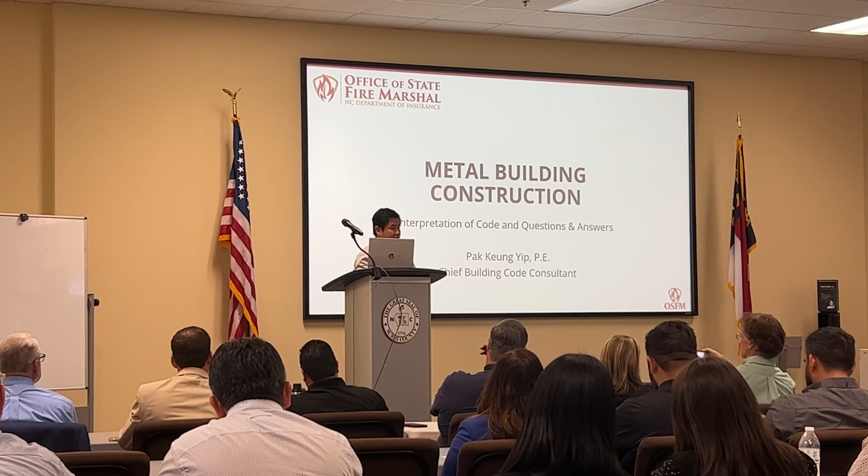I'm gonna turn this over to Pak and DOI and see what we can do to make this better. Thank y'all. My name is Pak Yip. I'm from NCDOI, Office of State Fire Marshal, Chief Building Code Consultant. Today I have another code consultant come with us to attend this meeting. I have Dan Dickman, who is our energy code consultant, and Curtis. He is our new residential code consultant, and also I got Tara come with us. She can address all the accessibility questions too.

So today here we are trying to address the code questions, if you have any. We try to provide the interpretation of the code. Again, DOI or Office of State Fire Marshal do not make the code. We're not writing the code. We are doing as best as we can to provide the code interpretation for you guys. Let's go through some of the terms that we come across regarding this meeting.

We have some concern from the homeowner, and when they have some code questions, they send an email to us. And today we are trying to address these questions to you guys and showing you what's the answer we provided, and hopefully it can create more consistency in the industry. So some of the terms that we come across, like the first one here, pre-engineered metal building. So this is the one that we deal with a lot with these metal buildings.

So these buildings are defined as a set of fabricated component assembly that form a partial building shell designed by the manufacturer. So these buildings come like a package. They were fabricated off-site and then delivered to the project site. Of course, they are metal buildings, so they are made with metal, non-combustible material, that's what we call. And a lot of times they were enclosed by metal panels on their walls as well as their roof framing too.

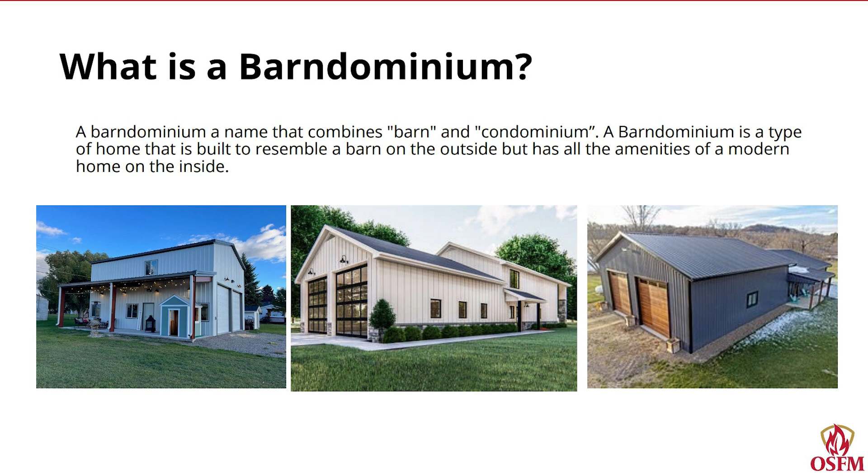Another term we come across, what is a barndominium? This is not a term that we define in our building code or residential code. So when I research online, this is the term that combines barn and condominium. So they're using a concept of barn building, the outlook of barn structures, and put the living quarters inside the barn to make it a barndominium. Again, barndominium is not a term defined in the residential code or building code. So how do we deal with that? It's a new structure, right?

So also we come across a lot of these metal buildings and how they frame these metal buildings. So you can see that the backbone of the building is made up of metal structures. And the walls and all the assembly inside the barn or the building is made up of, for example, in this couple of examples here, wood studs, just like a typical house building anywhere in the States.

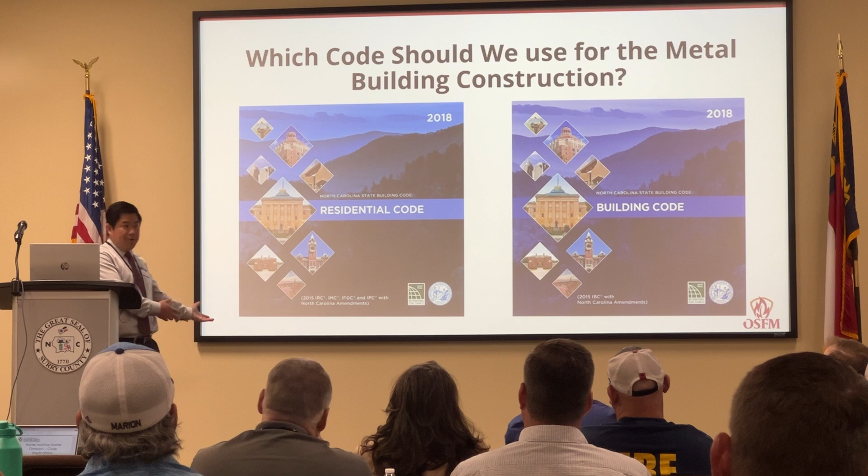So a lot of the questions we come across is, for this metal building, what code is supposed to be used for building this metal building? A lot of misunderstanding is, oh yeah, this is a metal building, it's not covered in the residential code, it has to be built under the building code. So today we try to clarify that. So in our state, we have adopted the residential code and building code. First, we look at the scope of the North Carolina residential code.

The provisions of the International Residential Code for 1 and 2 family dwellings shall apply to construction, alteration, movement, enlargement, replacement, repair, equipment, use and occupancy, location, removal, and demolition of one or more detached 1 and 2 family dwellings and townhouses located on a parcel not more than 3 stories. Let's start here. So the key here is the residential code scope is towards one or more detached 1 and 2 family dwellings and townhouses located on a parcel.

So if you're building a structure that can qualify as a dwelling unit, 1 and 2 family dwelling unit, townhouses on a parcel, you can use the residential code as long as it is no more than 3 stories in height above the grade plane with a separate means of egress, and their accessory structures are no more than 3 stories in height above the grade plane. So these are the criteria if you can use the residential code.

It's not controlled or judged by what type of material you use. You can use masonry structures, you can use metal structures, anything you can think of for your residential house, as long as you meet the scope of the residential code.

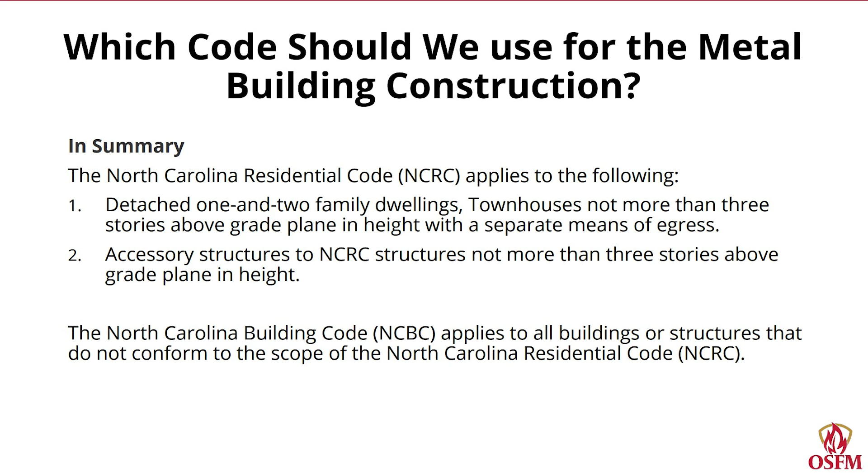Now, one question that comes up a lot is, what if we build a structure that does not meet this residential code? For example, if I build a storage building that is not tied to a residential house. The way we interpret that is this has to be under the building code because it doesn't meet the dwelling unit criteria. It doesn't meet the scope of the residential code. So we have to use the building code to interpret that.

So another question we get a lot is, is engineered design always required for a metal building? So again, we're starting from the residential code first: when a building of otherwise conventional construction contains structural elements exceeding the limits of section R301 or otherwise not conforming to this code, these elements shall be designed in accordance with accepted engineering practice. The other part of that tells you how to use the engineer for that.

So the key here is that if your structure contains structural elements exceeding the limits of section R301, R301 from the residential code sets the criteria, the design criteria for your building. So it sets up your wind requirements, what type of references you can use for your building, or the second criterion, not conforming to this code, which is the residential code.

So the rule of thumb is if you have a building that does not conform to the residential code, again, we look at the residential code as a prescriptive code. So it gives you the design of the structures. For example, chapter 5 gives you the floor, chapter 6 gives you the stud height, braced wall, chapter 8 gives you the rafter size. All these are covered in the residential code, right?

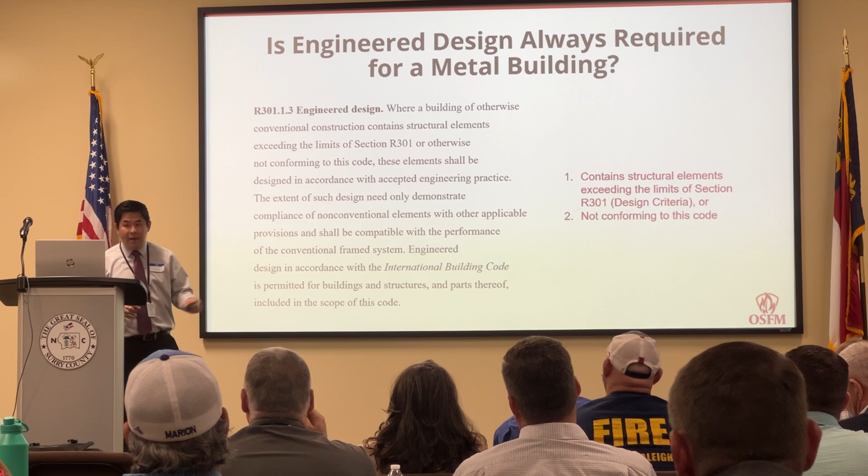If you can use this information, these design elements for your building, you don't need an engineer. You can use the residential code for that. Now, if you have something that is not covered in the residential code, then under this section here, it will require an engineer to help us evaluate whether it meets the code requirements or not.

So another thought is the building permit. Now this, we want to cover that. This one first is, which code requires the building permit? So the building permit is actually not coming from any code, not coming from the building code, not coming from the residential code. It's actually coming from the General Statute, 160D-1110.

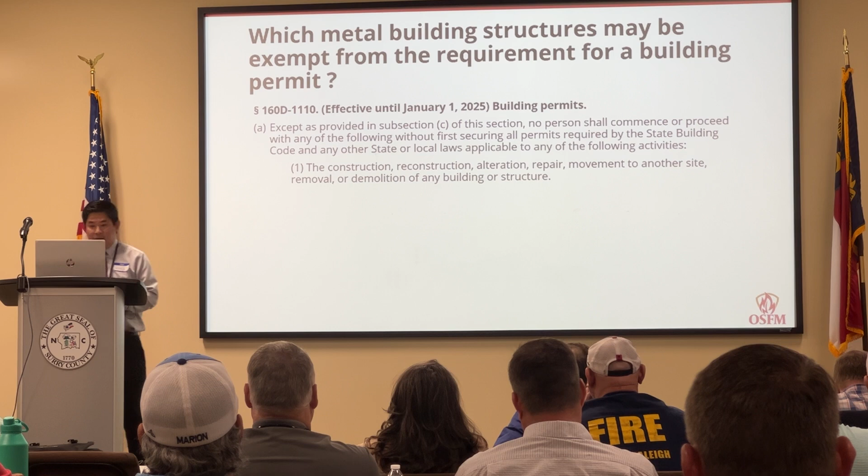Except as provided in subsection C of this section, no person shall commence or proceed with any of the following without first securing all permits required by the State Building Code and any other state or local laws applicable to any of the following activities: the construction, reconstruction, alteration, repair, movement to another site, removal or demolition of any building or structure. So you should have a permit for any construction, unless it is exempted by the North Carolina General Statute or the NC Building Code or the Residential Code.

So the General Statute actually has an exception for farm buildings. So if your building qualifies as a farm building, not used for sleeping purposes, then under 143-138 it is exempt from the building codes. Which means that if you qualify under that statute requirement, this is a farm building, meaning non-residential buildings or structures that are used for bona fide farm purposes as defined in these general statutes here. That is an exception from the general statute, that you don't need to meet building codes.

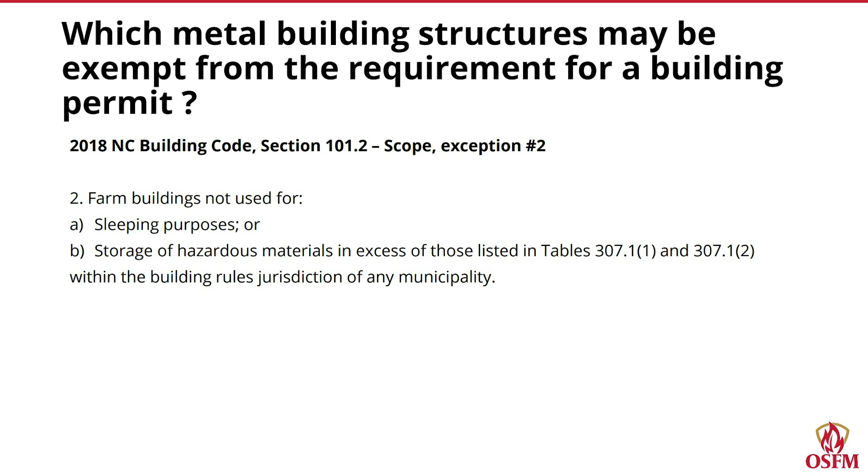Now, the building code also has exceptions. Section 101.2, the scope, exception number 2, says pretty much the same, except that if it qualifies as a farm building, not used for sleeping purposes, or not used for storage of any hazardous materials exceeding Table 307.1(1) or 307.1(2), then you are exempted too.

From the residential code, we also have one exception for similar structures, which are identified as accessory structures. Under item 6, detached garage, detached carport. So under accessory structures, a detached carport is supposed to be constructed per the residential code. But there are exceptions that apply to that. Portable lightweight carports not exceeding 400 square feet or 12 feet mean roof height are exempted from the residential code.

So if you have an accessory structure, now again, that's why I put the definitions here. It has to be an accessory structure to the dwelling unit. It cannot be a standalone structure, because a standalone structure will be under the building code. If it is an accessory structure to the residential building, and if you qualify as not exceeding 400 square feet and not over 12 feet mean roof height, and use it as a carport, you're exempt from the residential code too.

So these are some of the examples here. So if you have a carport less than 400 square feet and less than 12 feet mean roof height, these structures are exempt from the residential code too. Again, that has to be tied as an accessory to the residential structure.

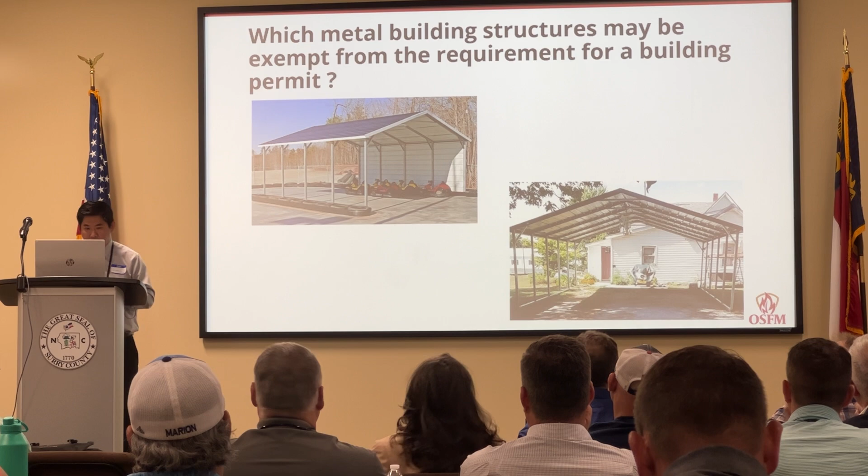So one thing that I want to clarify is, even though you are exempt from the building code, either by the general statutes, building code, or residential code, all electrical system work requires permits too. And 143-142 requires that electric wires of houses and buildings shall conform to the requirements of the building code and any other applicable state or local laws. So even though you qualify as a farm building, even though you have a carport that is exempt from the building code or residential code, you still have to have an electrical permit if you have any electrical system work involved in that.

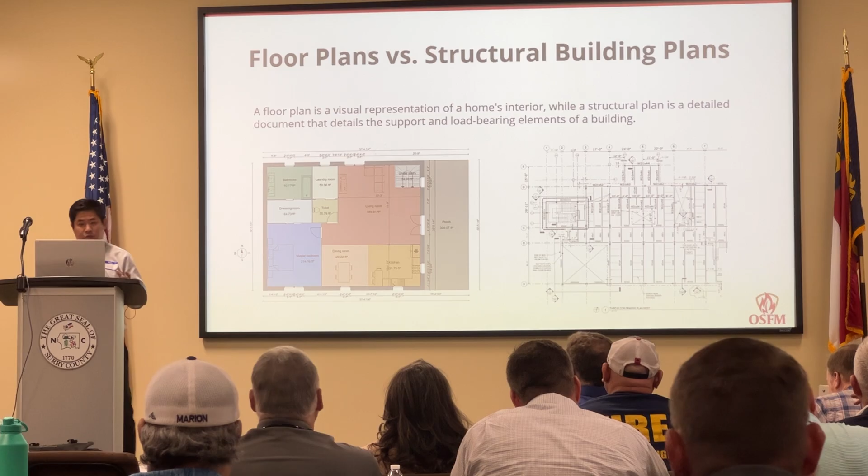So let's talk about how we comply with the code. So I want to clarify one thing about the documentation for applying for this permit. I want to clarify what is a floor plan and what is a structural building plan. So a floor plan basically is a visual representation of the home interior, while the structural plan is a detailed document that details the support and load-bearing elements of the building. So when you see a floor plan, you see how the designer divides the interior space in the house. But the structural plans cover all the backbone of the house. For example, the foundation, the framing, the roof framing, any details for that.

Again, this is one of the examples of floor plans. The floor plan will show the interior wall locations, the rooms' layout and size, and the size and location of the windows and doors. The reason why we have to have a floor plan is to make sure that this building complies with the code. There are a lot of requirements, for example, from chapter 3 in the residential code, about the rooms. So if it is a bedroom, what do we require? A bedroom requires egress, the special egress requirement for a bedroom. We have to have an egress window in any bedroom. The room size: we have a room size and minimum dimension for a habitable area from chapter 3 in the residential code. So the floor plan will show all these for that particular building, whether it meets the code or not.

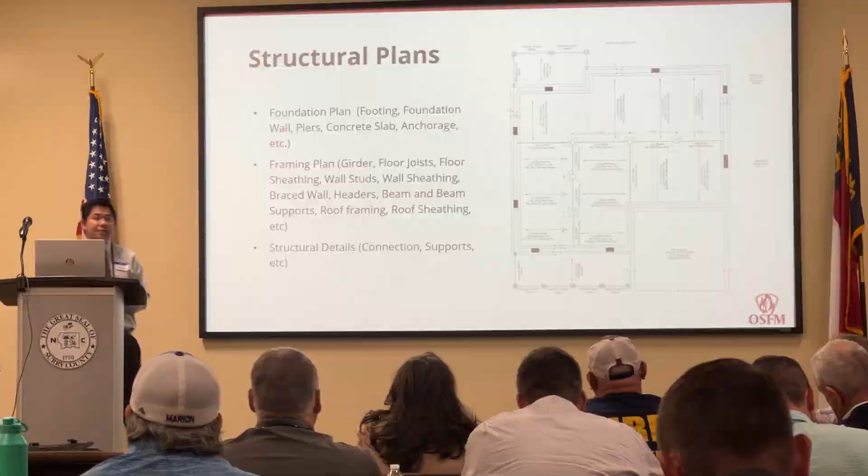Now, from a structural plan, typically a structural plan, like I said, covers the foundation, including footing, foundation wall, piers, concrete slab, anchorage details, things like that. The framing plan covers the girder size, the floor joist size, any type of wall sheathing, the wall stud size, braced wall header size, beam or beam supports, roof framing, roof sheathing, all these framing elements. Also, it usually covers the structural details too.

So a structural plan covers the construction, the structure requirements. But most of the time, structural plans don't necessarily cover the floor plan's details. In a structural plan, you probably won't find the room length, the dimension of the rooms. It doesn't cover the room's layout, the interior wall location. It doesn't cover that type of information. So that's the difference between these two types of plans.

So there are a lot of questions about structural plans too, when we receive questions from homeowners or local jurisdictions. One of the ways we look at the structural plan is from the code official standpoint: we don't review the details of the structural stuff. We cannot evaluate whether you need 5 bolts here, 10 screws here, 5 nails there. We cannot do that because we're not PEs. A code official is not a PE, so we cannot interpret the design of that.

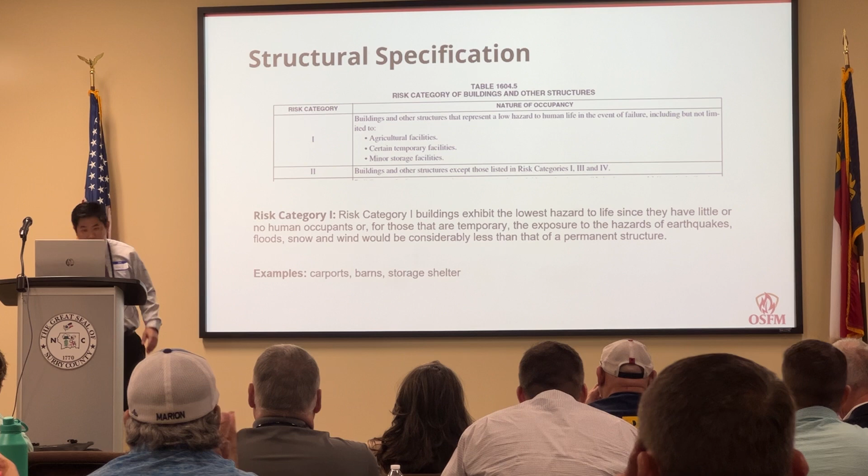So risk category comes with 4 different categories covered in the code. The first 1 or 2 will most likely apply to the meeting today. 3 and 4 are more important buildings, for example, airport, fire station, EMS station. But I want to clarify that. A risk category 1 building has the lowest hazard to life since it has little or no human occupancy, or for those that are temporary, the exposure to hazard of earthquakes, floods, snow, or wind will be considerably less than that of permanent structures. Examples are carports, barns, storage shelters. These are buildings typically not for human occupancy.

So for example, you have a small storage building on a farm, or even one attached to a primary residential structure. These are risk category 1. Risk category 2 typically covers anything that's not defined in 1, 3, and 4, and it covers most residential buildings.

The reason I want to bring up the different risk categories is we come across some plans where the engineer designates that the building is designed for risk category 1. Now, if it is designed for risk category 1, it cannot be used for residential purposes, because it has to be risk category 2 in order to use that building for residential use. So that's one piece of information that we come across that we need to clarify. Another thing is the load requirements.

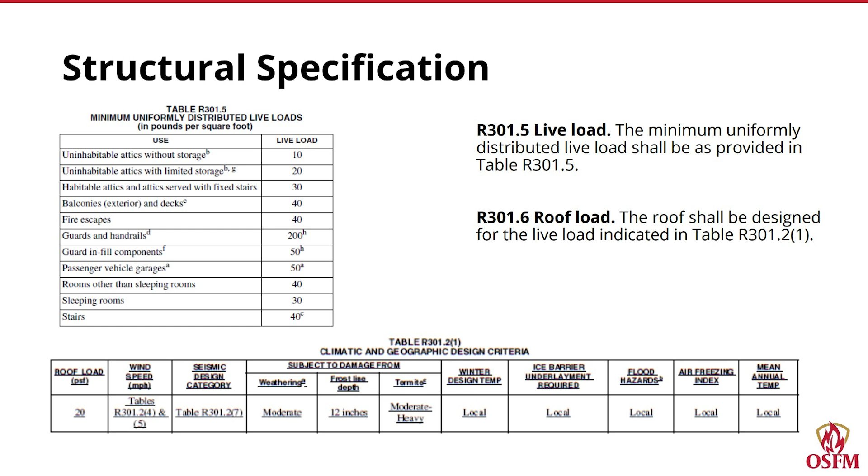Chapter 3 in the residential code outlines some of the load requirements, especially live load, for residential structures. And also, table 301.2(1) requires in North Carolina that all roof loads for residential structures meet 20 PSF live load. And of course, there are other criteria you have to meet for the climatic and geographic design criteria.

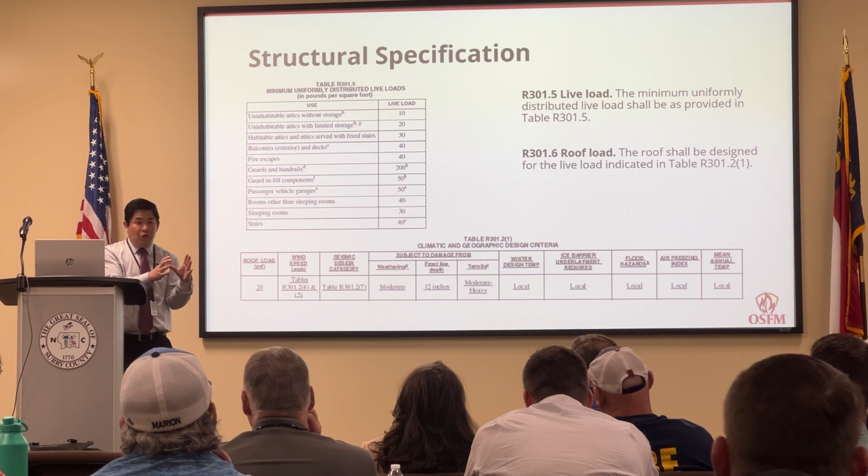The reason I want to bring up the loading requirement is we have questions from homeowners who receive a plan where the structural loadings might not necessarily meet the criteria outlined in chapter 3 of the residential code. And this is the minimum that the code official will look at and review, to make sure that the loadings in the structural specification on your plan meet the residential code requirements.

Another loading that we have concern with is the wind design criteria. North Carolina actually has different wind design zones in the state. On the coast, we have a higher wind zone. In the middle of the state, we have a typical wind speed. And then in the mountains, we actually have a higher wind zone because of elevation change.

And this wind speed design criteria is also covered in our residential code, tables 301.4, maybe? Yeah, 301.2(4), 301.2(5). And this is set by county. So it tells you, depending on which county you're located in, what wind speed you're supposed to design that structure for.

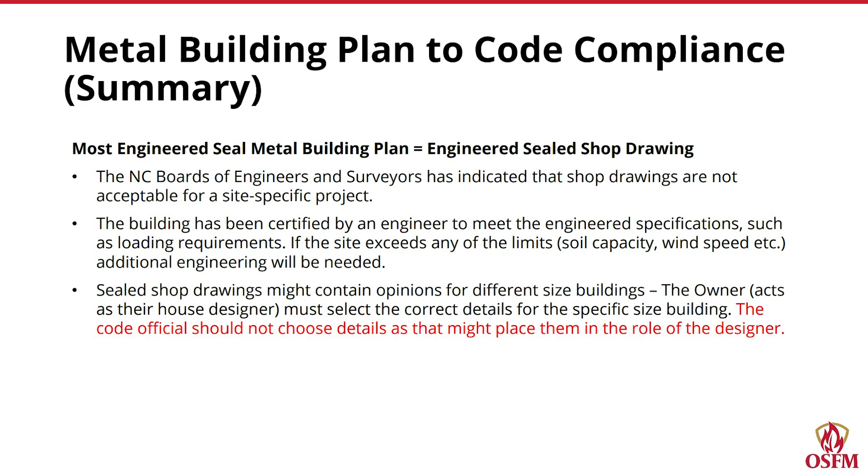So if they present a plan with all these options, the homeowner has to pick the options that meet the criteria for their local climate area or the size of the building. The code official cannot do that, because otherwise it would put them in a designer position.

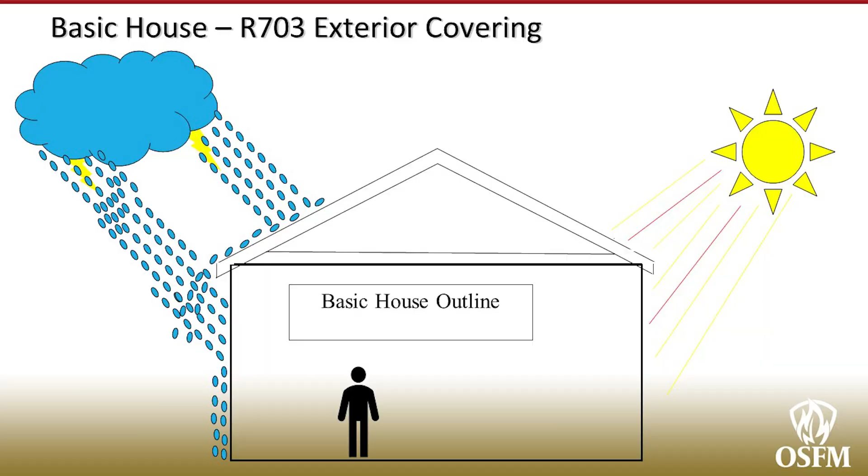So it's not all just words. I have some pictures here. Here's your generic outline of your house. You know, the rain pushes it off. The sun has remarkable properties of driving moisture back into the environment. See? So we're going to zoom in on some of these items. Exterior coverings or claddings are the roof system and the wall system. We're going to zoom in on some of these.

R703.1.1, water resistance. This is from the residential code. It requires a water-resistant barrier behind the exterior veneer, that's our claddings, required by R703. The purpose of claddings: they shed water and protect the remainder of the wall and roof system. Vinyl, face brick, and wood clapboard are all ventilated sidings, as are many of today's sidings, so they rely on a drainage plane behind the siding to allow the miscellaneous water to either drain away or evaporate back to the outside before it causes rot to the wood or corrosion to the siding or fasteners.

Likewise, metal panels also have seams and penetrations and cutouts for windows, doors, and utilities. Any water, whether from weather or from condensation, and people always forget the condensation thing, it's a driving force that's always there, must be planned for and either provided a drainage plane or a means of re-evaporating so it does not sit and cause rot or rust to the cladding fasteners or deterioration of the cladding itself or the substrate. Remember the wind zones that Pat talked about? Well, that cladding only stays on there as long as your fasteners are not corroded away.

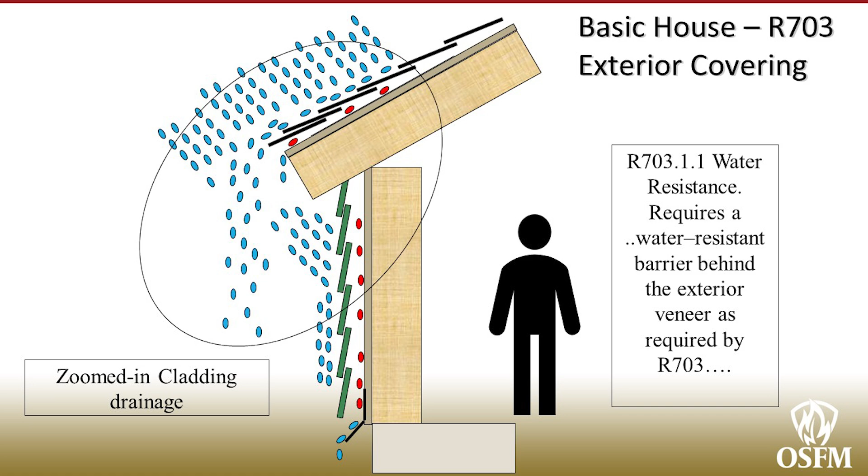These sidings are water resistant, not waterproof. And they have a daily response with the sun, the water vapor in the air, and the building properties they are made up of and help protect. So here again, we have a little illustration there. And we're zooming in on the cladding, this clapboard type cladding. So, zoom in on it again a little closer.

The raindrops highlighted in red are drops that made it past the exterior cladding. They are drained by the water-resistant barrier. Notice how it kicks out on the bottom there? That could be your flashing, kick-out flashing. Okay? This is a normal everyday house.

The barrier could be builder's felt, house wrap, or other materials designed and installed to be a drainage plane behind a cladding. Even in normal construction, spray foam does not address the drainage plane of the exterior cladding as it was applied from the interior and is typically under the sheathing.

So let's change the design outline for a pole barn or barndominium. Okay, here you have a pole barn. I know there's some variations, but here's a basic pole barn outline. We'll zoom in. Now, take the case where you have a basic machine shed type pole barn, good strong construction, but there's no insulation and no sheathing.

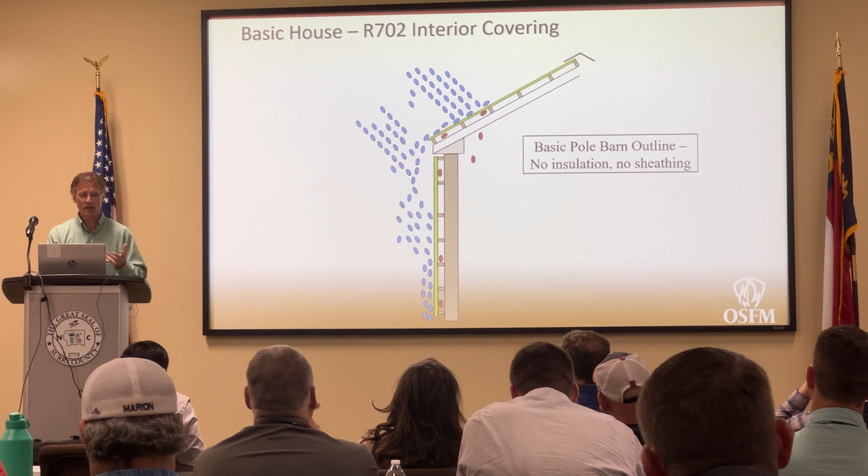Stray water, the little red drops there, that gets past the cladding can drip down the interior of the metal panels or drip down into space, but does not puddle up against frames or fasteners. No harm, no foul. Now let's put internal walls in there, and let's put some spray foam in there.

Now, there's many different ways the walls and roofs could be done, I understand that, both with and without continuous sheathing, but in all cases, the concern for what I'm talking about here is the concern for water that gets past the cladding. How is it drained? How is it handled? That's what the prescriptive code is asking for.

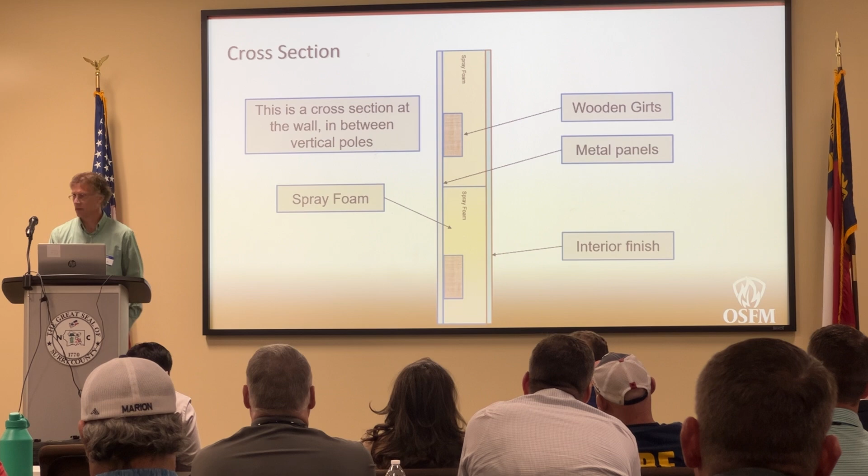So here's a cross-section of a wall in between the vertical posts. These are your wooden girts, and the exterior there, that's pointing to the metal panel on the exterior. And your interior finish, which would usually be a gypsum. Here's an exploded view of it. So the rain is hitting the metal panel on the outside.

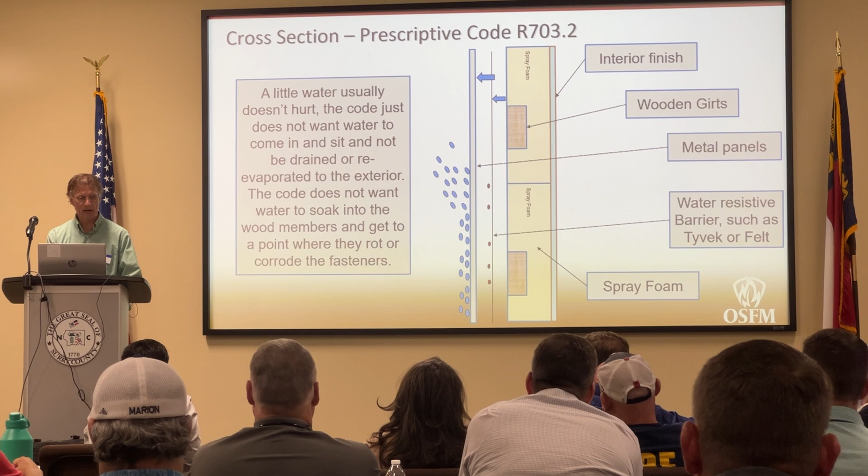But suppose you had a standard construction, you have a water-resistant barrier such as Tyvek or felt, that would be your drainage plane. Anything that gets past there drains down. So a little water usually doesn't hurt. The code just does not want water to come in and sit and not be drained or re-evaporated to the exterior. The code does not want the water to soak into the wood members and get to a point where they rot or corrode the fasteners.

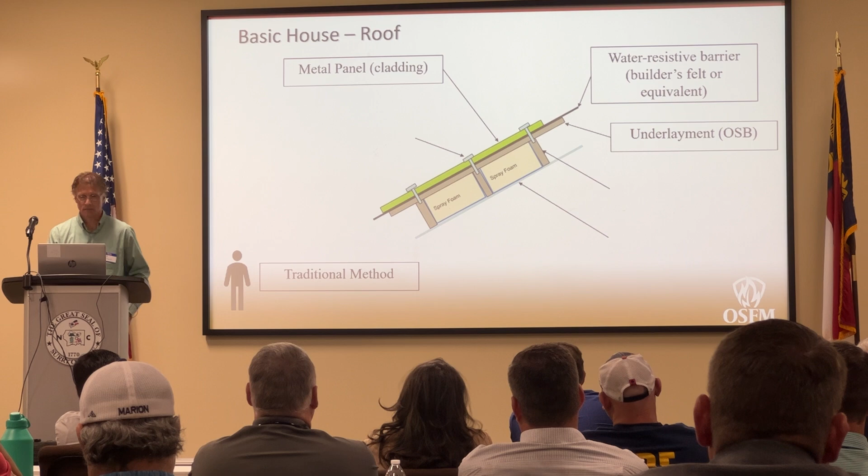So here's the traditional method of a roof. You have a metal panel, that's your cladding, and then you have a water-resistant barrier, that could be a builder's felt or its equivalent, but then you have an underlayment, OSB, that would be normal. And then your purlins, and then your interior finish could be gypsum, and your fasteners. Here's an exploded view of that. But the key here is that underlayment, the OSB.

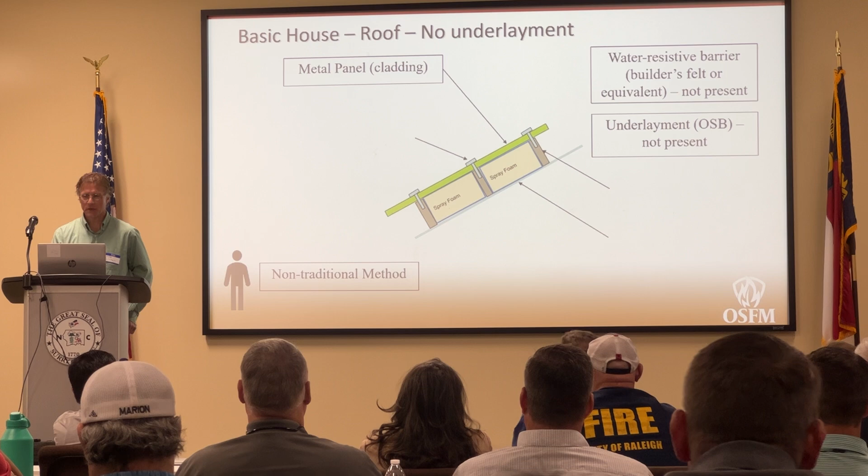Now here's what I start getting into, a non-traditional method for the residential prescriptive code. We don't have a water-resistive barrier. We get this question. They just want to spray foam directly to the underside of the metal. Simplest way, I understand that. But the builder's felt or equivalent is not present. And the underlayment, the OSB, is not present. The metal panel is actually providing the structure, like a screwed-on metal roof, it's the structure also. And of course your purlins.

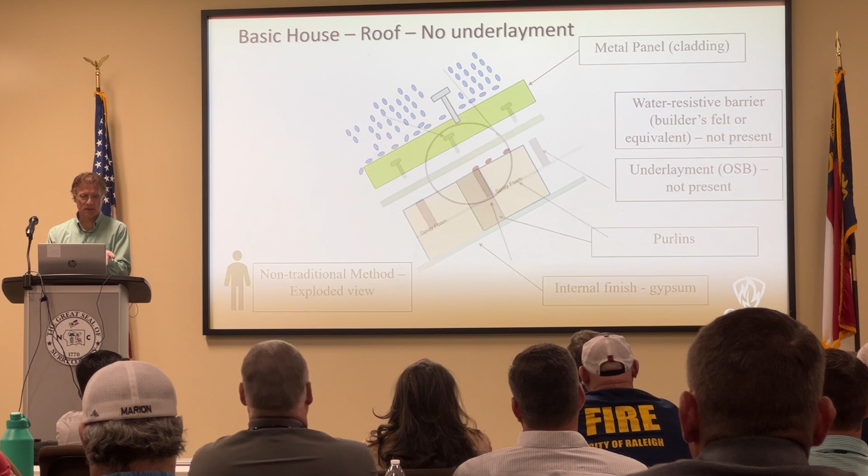So let's explode that. Zoom in on that a little bit more. Nope. Zoom in again, sorry. But you see there those little blue raindrops? Those are the issue, right there.

This non-traditional method, how does it handle that? What happens here without a drainage plane? Does the water re-evaporate to the exterior without damage? Or does the wood soak up the water and start losing its ability to withstand pullout? Or do the fasteners or metal panels start corroding, thereby reducing the cladding adherence properties?

So I just point out there's many different ways you can fasten metal cladding to a roof, but the water-resistive barrier is not exempt by any given method, prescriptively. Okay.

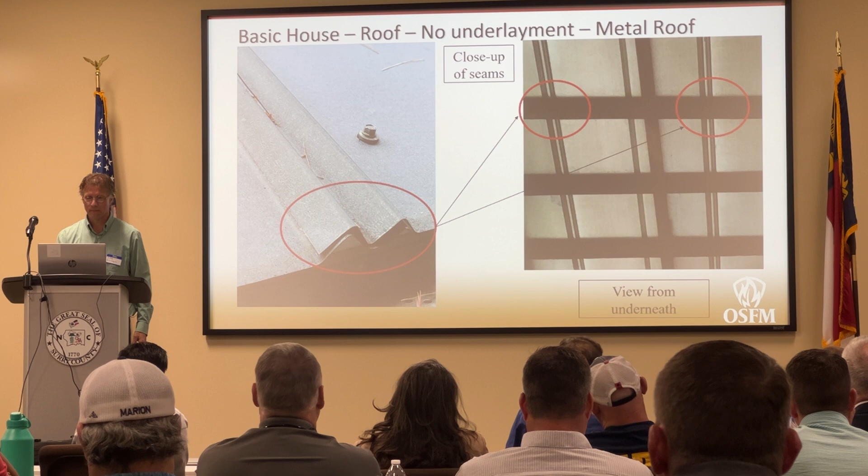So your bulk water just drains away. We see that, no problem. However, warm, moist air migrates in. It draws it in the evening. The metal cools off rapidly. How many of you have seen metal roofs rain from the underneath if there's no insulation? Everyone seen that? That can be a daily process for many months of the year.

But it also causes vapor to condense in the seams and the pocket formed between the metal and the wood framing. Now, condensation in the seam itself will just drain out. It's condensation in the pocket that is an issue, as it cannot drain out. So the sun hits it in the morning. The sun is going to drive out some of the moisture during the daytime, but it's unknown if all of it will be driven out or if seasonal drying will overcome seasonal wetting.

Again, the prescriptive code simply avoids having to answer this question because the drainage plane will be uninterrupted. Remember, it just says you're going to have a drainage plane, period. So we as code officials, and the code officials in the field, can't answer this question. I can't necessarily answer that question. The prescriptive code, built over decades of empirical experience, avoids having to answer it. But if you're doing an alternate method, you need to know the answer.

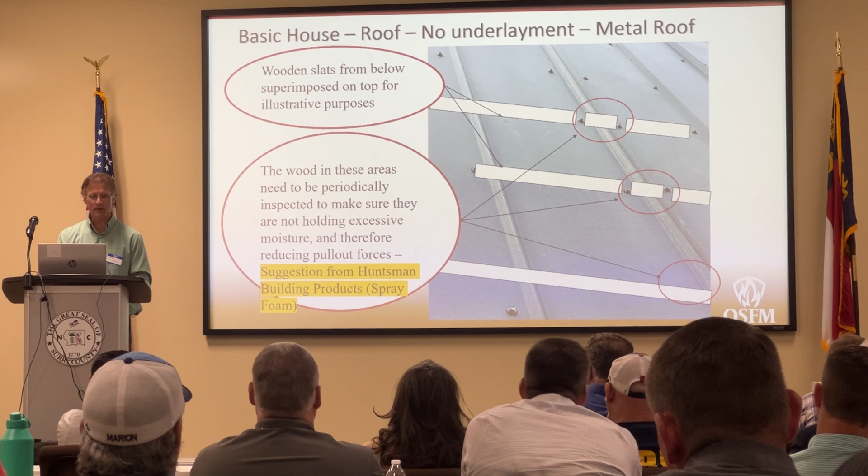Now, I want to read the second bubble there. The wood in these areas needs to be periodically inspected to make sure it is not holding excessive moisture and therefore reducing pullout forces. That's from Huntsman Building Products. They own Icynene, I think. Big manufacturer, quality manufacturer. That's their suggestion in their sales literature. So I'm not making this up. Here's, again, the basic house underlayment.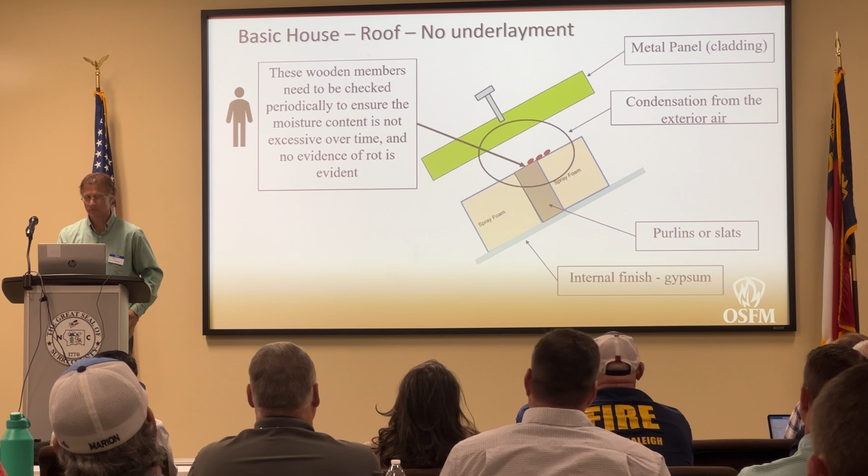Right there. That's just a different view of pointing it out. You know, what's happening there? They're concerned. They realize there's a concern there that's not addressed in the prescriptive code. So what do you do? Again, here's the traditional method on my right, with spray foam.

And if you say people want a simple way to do this without having to avoid all these issues, you can still build it with sheathing. And a lot of those issues go away. And like I say, there's many different ways to build this. This is still an easy way that, okay, you avoid all those issues that we just talked about if you just sheath the building.

So, getting into some summaries here. If the prescriptive code is not being followed, how does the proposed wall and/or roof construction sequence and materials provide the equivalent level of protection to the building assembly? And is the permit holder addressing all the required code sections and functions of the roof or wall?

So if the prescriptive code is not being followed, 904.1: the requirements set forth in this section shall apply to the application of roof covering material specified herein. Roof assembly shall be applied in accordance with this chapter and the manufacturer's installation instructions. Installation of roof assembly shall comply with the applicable provisions of R905.

904.2, compatibility of materials. Roof assemblies shall be of materials that are compatible with each other and with the building or structure to which materials are applied. So I think of an example here.

Pat, can I have all the contents of your wallet, including PIN numbers? Say no. Pat, can I have all the contents of Tara's purse, including her PIN numbers? Say you don't care. I don't care. Tara, you have to give me all your information. Say no. No. But Pat said it's okay. It's not his call, is it?

So, I guess I won't get into alternate methods here because, like I say, we can talk about that after lunch. Oh, so at one point there, it can be difficult to redirect an installer's mindset from the energy code air barrier requirements and the vapor retarder requirements of section R702.7 to the residential building code requirements, R703.1.1. And that was the purpose of this little issue here. That's the end of that.

I want to just follow up and say, you guys in the room who are designers and building inspectors and contractors alike, I think these two fellows right here just gave a great presentation in my opinion. I was a former building inspector from years back, and I think they did a great job to provide good scenarios and talk about when permits are required, design criteria and that sort of thing.

So, again, my name is Curtis Huff. I work for the NC Licensing Board for General Contractors. My title is Field Investigator, but we are also field representatives, which means we like to keep our public informed, to talk to them about board rules, regulations, and that sort of stuff. My presentation will be as short as I can possibly make it. I think we're running a little bit behind, but I hope that this afternoon, as we have our Q&A, I can get a lot of good questions from you. And I'll be happy to answer anything I can. I brought cards so that you can contact me later if you need to.

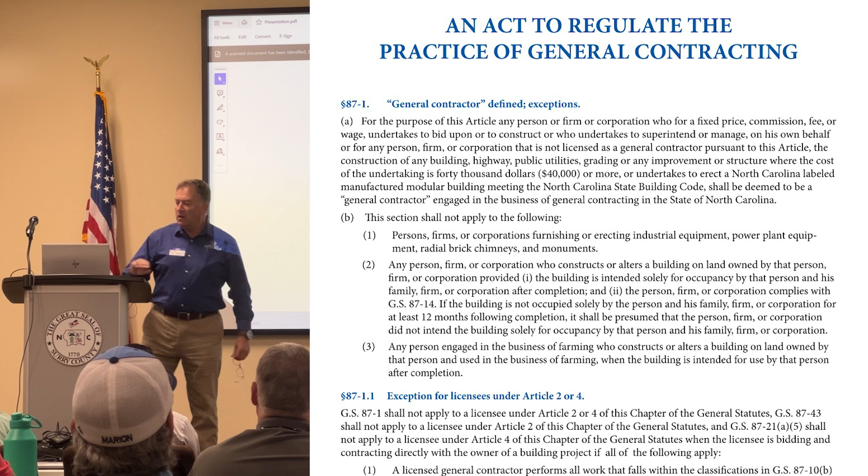So, you've got a pretty good idea about general contractors. Now, I think there's going to be some good Q&As this afternoon, especially from the metal building company folks, about who's installing, who's building, who's erecting, who's contracting. I'll get into the weeds on that this afternoon if you like. For the sake of time right now, we're just going to talk about who we are and what we do. So, that being said, we regulate the practice of licensees.

And we hold our guys accountable for all sorts of things, okay? If you have a license with this board, we hold you accountable for operating; you have to operate in the name and style of the license. Your qualifier is a part of the license, whether it be a sole proprietorship or a corporation; you have to be a W-2 employee, managing member, that sort of stuff.

If you're a residential building contractor, you can't go out and build a 3-story high-rise. What's it called? 4 stories is high-rise? When we turn into high-rise. Nonetheless, you can't build anything that big. You got to stick strictly to residential, right? Which is family dwellings, townhouses. I forget what the other one is. Nonetheless, you have to stick to the classification.

If you're a pool contractor with the board, you can't build a house. You kind of get the idea of how that works. And then we have limitations, dollar amounts on projects that you can work up to. We have limited, intermediate, and unlimited associated with that. So that's the biggest part of what we do. And if there's licensees in the room, you kind of have an idea of what this is all about.

If you want to know more about licensure and what it's all about, you can see me after the presentation's over with, and I'll be happy to discuss it. Give you a card if you need it. You can contact me later.

So now, we're going to move on down to another general statute, titled 87-13. 87-13 is a general statute that speaks to the unauthorized practice of general contracting, impersonating a contractor, false certificate, giving false evidence to the board, and penalties. Now in 13, and not the one below it, 13.1, board may seek injunctive relief. For the most part, this section states that if any person, firm, or corporation is engaging in the practice of general contracting for which you don't have a license, you're guilty of a misdemeanor.

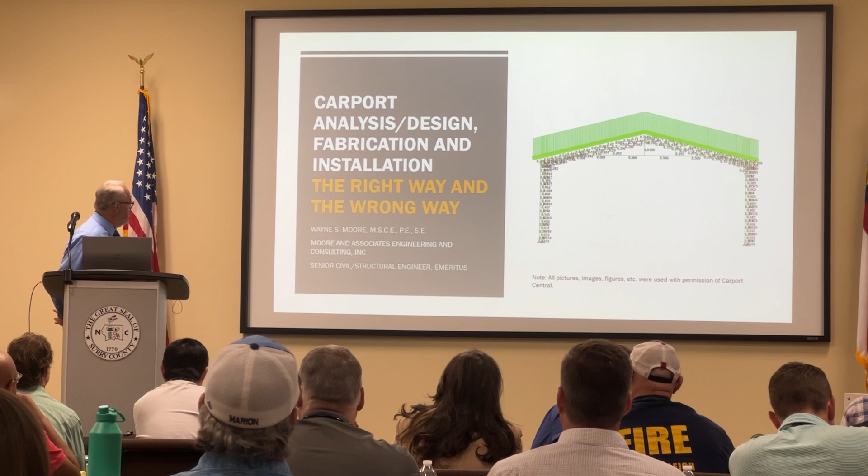And I'm here to talk to you about the right way and wrong way of carport analysis and design, fabrication of carport structures, and installation of those structures. And I'll try to hold it to 2 hours. I think that's what I have for now.

In the beginning, the carport industry started out fairly humbly, providing 1 and 2 vehicle open and closed carports, primarily for agricultural and residential use. I think we've all seen these on the side of the road. You know, what used to be $6.95, but I think with inflation it's probably $12.95 now.

Typically risk category 1. You heard Pat refer to risk categories. I think also the building official referred to them. But these, again, primarily non-occupied risk category 1 structures, basically representing a low hazard to human life, low hazard storage structure. They typically were less than 30 feet wide, with eave heights typically 12 foot or less, and they were typically based on master design, which I'll talk more about shortly.

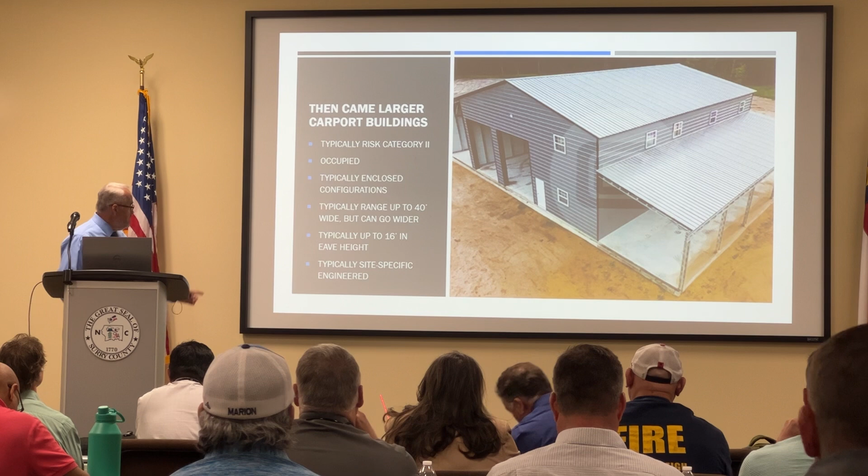Then came larger commercial carport buildings. Typically risk category 2, but there have been risk category 3 and 4 uses. Risk category 3 being a group assembly, large assembly building. Category 4 being a lifeline structure, housing maybe ambulances or emergency generators for a hospital. Typically enclosed in configuration, ranging up to typically 40 feet in width, but they have been wider than that. Typically with eave heights up to about 16 feet, and certainly site-specific engineered.

And what has become a fairly recent phenomenon is their use as residential structures. Trade name barndominiums. And these, of course, are risk category 2 structures, as already has been talked about by state officials. Certainly, you have to address egress from sleeping areas versus through personnel doors on commercial structures. They have to be properly moisture controlled and properly insulated. There's been some discussion about that already.

They typically range from 30 to 40 feet in width. Typical eave heights for single story, 12 foot, but they have been 20 foot in height to allow for a 2-story residence. I think I saw a slide earlier that showed a 2-story. And site-specific engineered with even some additional design provided by a professional architect.

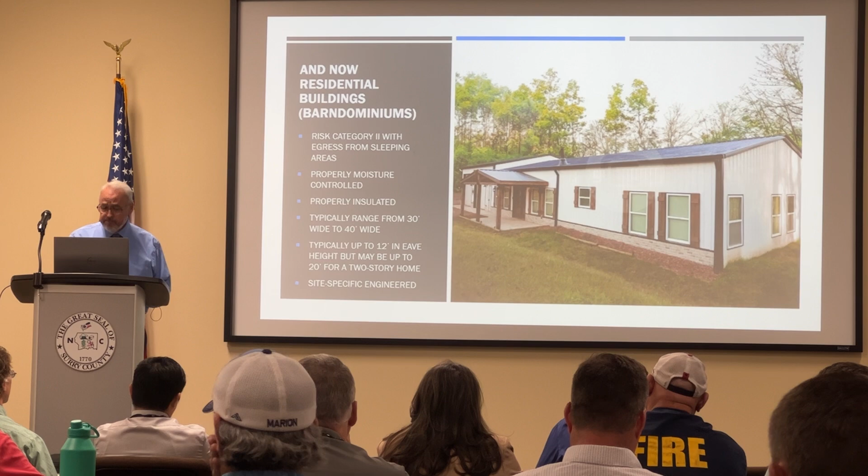So what is the right way to analyze these structures? If a master design is used, which is typically only for risk category 1 buildings, then that is done to an envelope of loads based on the number of states that the master design is signed and sealed for. And it should be done to the latest codes that those states adopt. And when states adopt codes, whatever version of, say, the residential or building code that they adopt, they will also have state amendments, and those have to be addressed. And of course, the master design is signed and sealed.

Site-specific design is done on a case-by-case basis. It is looking at the loads and codes applicable to a specific address. Really, in both instances, the calculations performed for master design or site-specific design have to be able to withstand the scrutiny of a peer review. This can occur because of an engineering board reviewing the calculations, or, God forbid, an expert witness from an opposing lawyer.

As has already been mentioned, these structures are not addressed in the International Residential Code. In the International Building Code, design processes are addressed. High-strength cold-formed steel or steel design along those lines is addressed, but not carport structures per se.

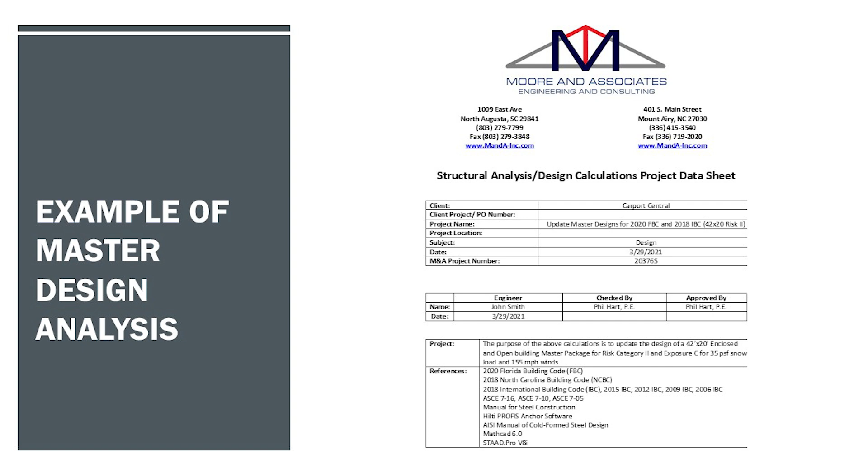This is an example of master design analysis. The cover sheet of the analysis should address the envelope of loads, the states that the package is being signed and sealed for, because again, the engineer needs to check those state amendments that could be in addition to or contrary to the international code. It certainly should list all references and so on. A typical cover sheet for a set of master design calculations.

Then, the body of the calculation should be a thorough analysis of the structure. Every aspect of it, stability, connections, foundations, so on and so forth. It should address foundation design as well, connection, anchoring design. And again, this would be in accordance with the envelope of loads that is being designed for.

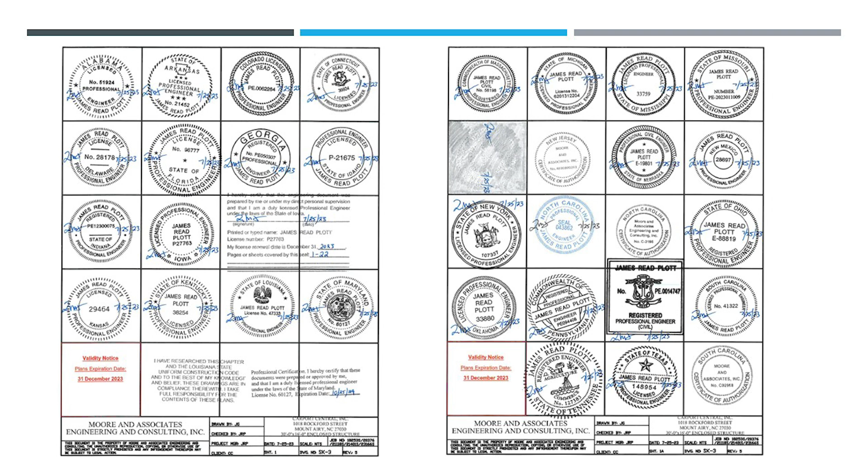So an example of master design drawing would be, again, a cover sheet clearly stating what the design is for. Many times master designs are revised. This one in particular is up to revision 5. You will see the states that the master design is applicable to. So for each and every one of these states, the amendments adopted have been checked against the multitude of international codes, possibly one state using 2018, another one using 2021, and so on and so forth.

This is very important, the drawing index, because this prevents insertion or deletion of sheets in the package. And that's also why the package needs to be bound. Okay, this is a requirement by the North Carolina Board and the other boards. The next sheet typically has installation notes, material specifications. This all needs to be there as well.

The building officials, they want to know what your loads are. That was talked about already earlier, and material properties and so on and so forth. So that needs to be part of those master drawings as well. After that, you're going to see elevation views, section views, sections and details, so on and so forth, necessary to fabricate these structures.

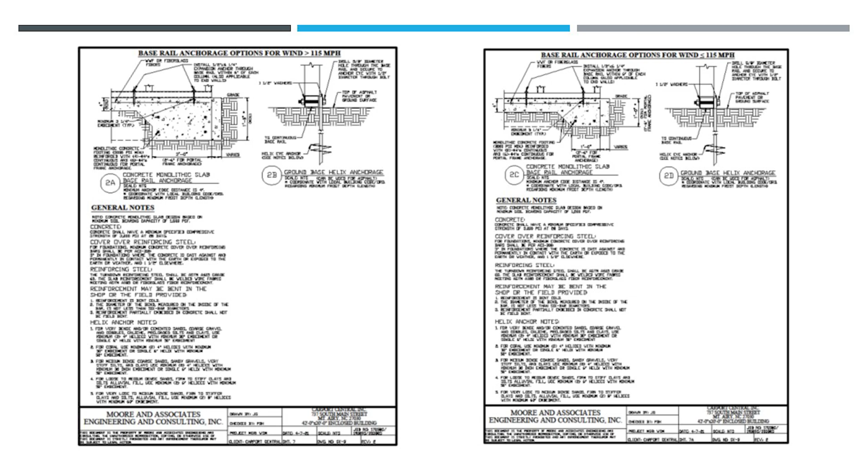And finally, you should see an envelope foundation design as well. Lesser loads, lesser wind loading for instance, require the smaller foundations. Greater wind loading, that higher end of the envelope, is going to require something larger.

An example of a site-specific design analysis is similar. You should see that cover sheet, this time listing the specific loads for the state or at the site location of the building. Again, also applicable code and other design references. You should see a good thorough analysis.

Most site-specific structures are 3D analyzed. You want to look at the behavior of the entire structure. You're looking at live loading, dead loading, wind loading, snow loading, seismic loading, and all the provisions required in typically ASCE 7, which is referenced by building codes. And again, a specific foundation design and anchorage for that design.

So an example of site-specific drawings are something like this. You're going to see this again on a larger border. Each individual sheet signed and sealed. The cover sheet should have general notes that clearly describe the loads as well as material specifications and properties.

After that, you're going to see elevation views of the structure, sectional views of the structure, details, all of this having been engineered in those calculations. You're going to see a detailed foundation plan and foundation sections and details. And that constitutes a site-specific design.

Example of a performance specification. I realize this is probably pretty new to most fabricators, maybe most of the folks in the room. But a master CSI format performance specification, when required, is generated to, again, give requirements relating to workmanship, quality control, and so on and so forth.

Now, I mentioned earlier about real-world university-level testing. This has already gone on in the industry, but more needs to be done. And in this particular case, the university was evaluating the behavior of wall and roof panels for these buildings. And we were also looking at different fastener patterns for these buildings. And as you can see, what they're doing is they're testing to failure.

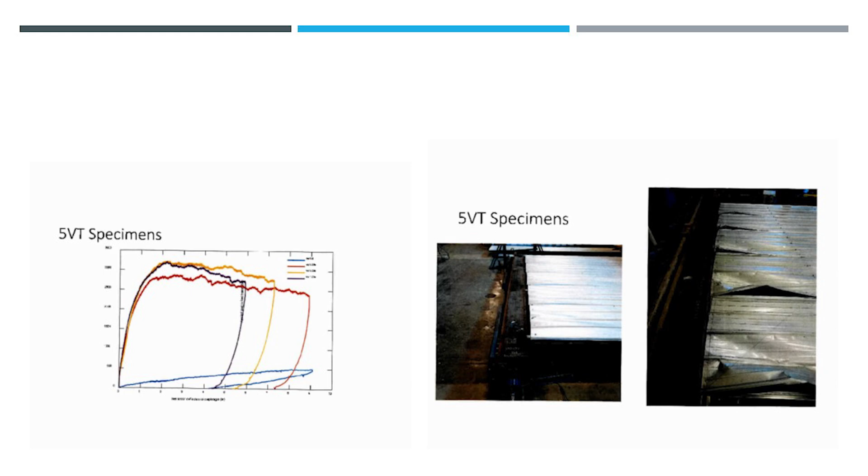Here's, I love this picture. I know it's kind of hard to see on the screen, but classical structural engineers, we like it. It just shows that classical behavior that we're looking for that yields shear diaphragm information.

So now, when we're looking at lateral and longitudinal stabilities of these structures, we can actually see that the panels are adding strength and stiffening to buildings. By our gut, we know that. We just have never quantified it. We're now quantifying it and learning the shear diaphragm capacities that are helping us to economize and optimize these structures.

We're even looking at the behavior of the tube at the base rail, the legs, the rafter members, the trusses. We're looking at the behavior, deformation, confirming what our assumptions are regarding how it's behaving at the connection between the columns or legs and the base rail post and the anchor.

So, now what is the right way to fabricate a building? First, a proper facility needs to be provided. It's got to accommodate and segregate receipt and verification of materials that it's receiving, the fabrication process, which is almost like an assembly line process, and then the staging for delivery. All of that needs to be accommodated, so it needs to be a facility that can allow for that.

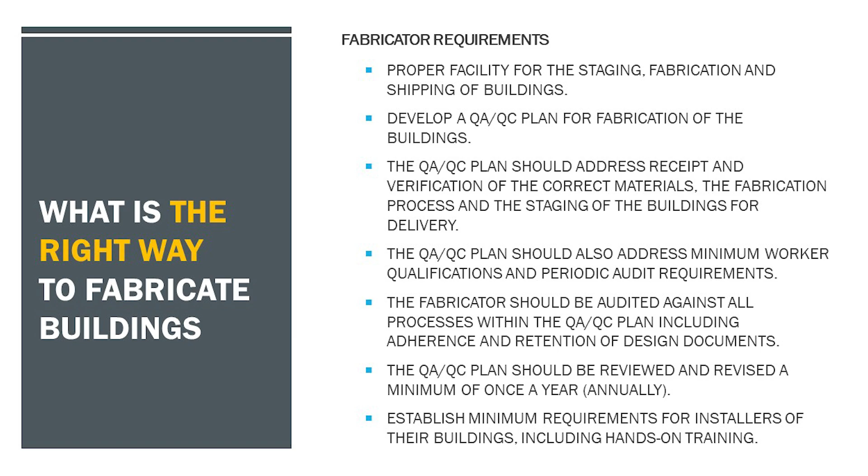To continue, the QA/QC plan should specify that installers, erectors, meet minimum licensing and insurance requirements to install their buildings. And the fabricator should belong to any governing industry body that is responsible for establishing minimum requirements. Such an organization, as of today, does not exist.

Consider the PEMB, or the Red Iron Metal Building Industry. The MBMA, Metal Building Manufacturers Association, exists and sets those minimum standards for manufacturers of those types of buildings. Most engineers and architects, when they develop a performance specification for those types of buildings, require that those buildings be MBMA certified. This industry needs to get to that point. It's not there yet, but it needs to get to that point. Every building produced, no matter which manufacturer it is, needs to meet these minimum requirements.

Until such time as that is created, the fabricator should meet minimum requirements set forth by the municipality, city or county that the building's being erected in. So the municipality can consider a registration process similar to the city of Houston, and I'll talk about that in just a moment. And that registration process should be updated annually.

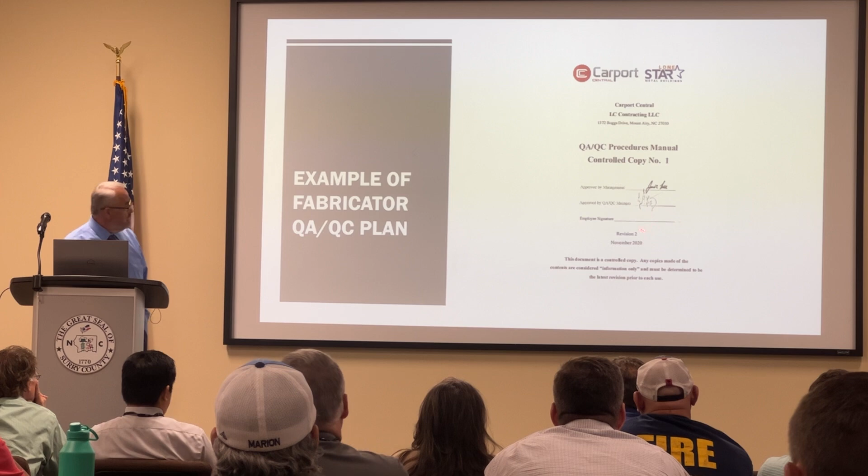So here's an example of a QA/QC plan. The first page of it should indicate that this is a controlled document, which means that if it's revised, every earlier version is collected and destroyed. Every worker, manager, and so on and so forth only has the latest one in their hands. It's signed off by those responsible for the QA/QC plan and for the fabrication process. And clearly the revision and date need to be there as well to confirm that it is the latest document being used.

Now, there are certain critical things that a QA/QC plan needs to address. Of course, control of the manual itself, the management structure of the company. Who do the workers report to? Who's their supervisor? Who's that person's supervisor? So basically, there needs to be a management structure defined in the plan. How are the drawings that are being developed by the engineers being controlled? How are those being handled? That needs to be addressed.

Of course, work orders received from customers, procurement of the materials and sub-assemblies that are used in the buildings, receiving inspection. Again, that harkens back to what I had said about verifying that you are indeed receiving the materials that the engineer has relied upon to perform the analysis. Otherwise, it'll just be a breakdown.

You can have as accurate analysis and drawings as you want, and intend the best building in the world, but if your equipment hasn't been calibrated, it could be making a structure that just isn't coming together very well. And I've certainly seen that as well. And then lastly, records, maintaining of records. Again, consider that you can be audited by anyone at any time, as I said, including state officials, or God forbid, an opposing attorney if a discovery is going on.

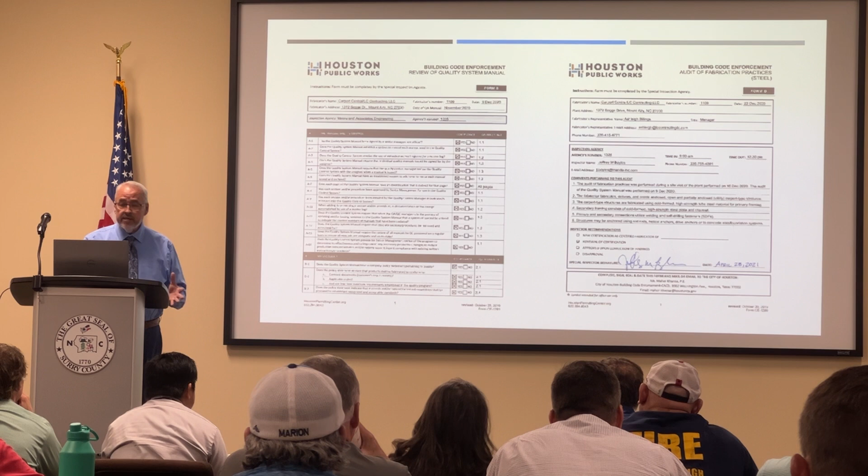This next sheet here is where most of the work occurs. An independent third party, typically a registered professional engineer, is going to inspect the QA/QC plan. Is it meeting those requirements I mentioned earlier? Also, are there any municipality-specific requirements that the QA/QC plan needs to address? And then there's a plant inspection performed by that party, again, auditing really against the QA/QC plan that the company has generated. Are they following their own rules, so to speak?

What is the right way to install and erect buildings? Well, the person directly responsible for erecting the building is the one who needs to pull the permit. I know that's already been mentioned as well, and what those requirements of that individual need to be. They should carry proper amounts of insurance and bonding. Again, this is applicable to residential structures. In the past, installers or others have convinced homeowners to pull permit.

Now, if it's a structure that is covered in the prescriptive International Residential Code, that's not a problem. Prescriptive is a fancy word for cookbook. So in other words, the person knows that they can look, as was referenced earlier, maybe look at a 2x joist member for a given span. If it's a living area or whatever, they'll know what the load is, and they can pick and choose the correct member. The building official is going to go out there and check that against the code. If it's good, great. If it's not, it's not.

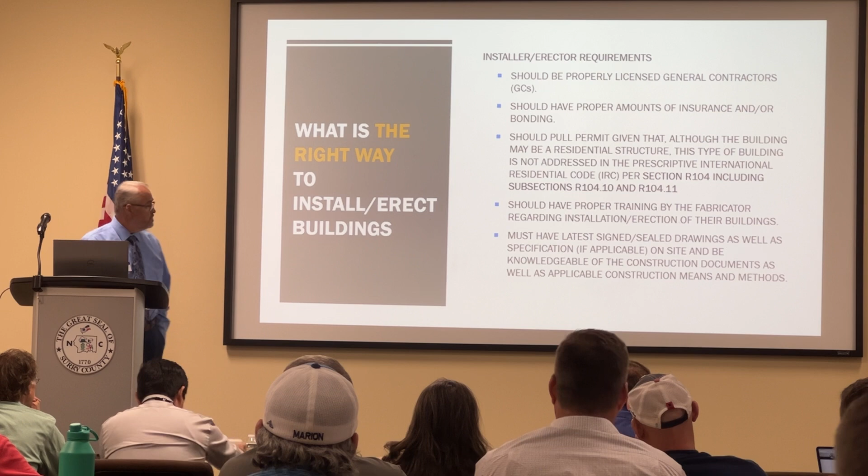That GC needs to be on the site inspecting the work. Now, I'm a professional engineer, not a general contractor, but I believe there's probably a requirement that a person performing general contractor duties is responsible for being on a job site a certain amount of time to supervise the crew, to supervise the work being done by others. They need to be on the job site.

And then do not vary from the design documents. This has happened too many times as well. And almost every time it's led to a problem. That installer or erector should not vary from the plans, not one bit, without written permission from the fabricator. The fabricator in turn should not authorize that without written permission from the structural engineer of record.

Now, the last part of the puzzle is the dealers. Now, the dealers are unique to the carport industry. They typically sell most of the carport buildings. Currently, dealers are not required to have any engineers on staff, nor are they required to be trained by the manufacturers that they represent. Now, those fabricators may require a dealer to do something like that. There certainly isn't any other driver. They're not required to be licensed contractors or anything like that, maybe other than to carry a business license.

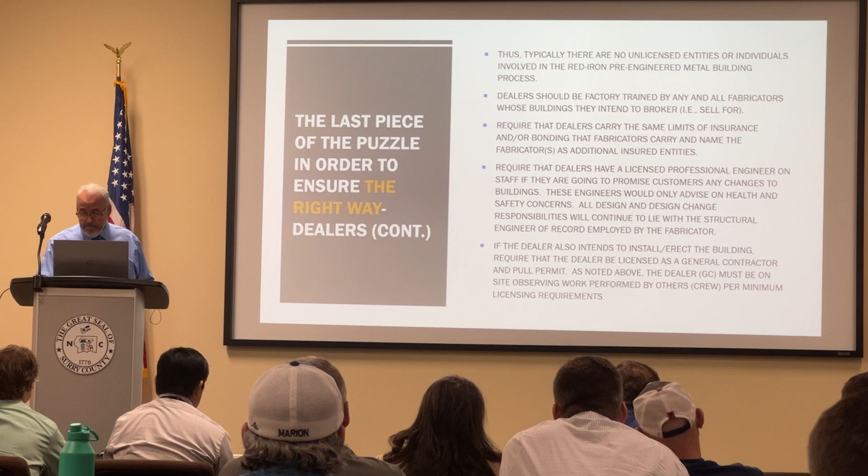So a summary of my recommendations. Again, analysis and design, all the documents need to be signed and sealed. Furthermore, the structural calculations need to be submitted to the fabricator along with the design drawings. Now let me tell you where I'm coming from on that.

I have firsthand experience with a project where the customer received the signed and sealed drawings in accordance with their municipality requirements. When the calculations were requested, they were told, oh, that's going to be an additional $2,500 and take another 3 weeks. What does that tell you? They were not done. So those drawings were plan stamped, which is a violation of state engineering law. We don't have anybody with the engineering board here, but they can certainly attest to that going on.

Submitting the structural calculations directly to the fabricator. Then either the fabricator or the engineer of record with permission would be the ones to provide those directly to the building official. The building official will not release that to the public. If a performance specification is done, it too should be submitted as signed and sealed.

And I have seen this happen. Whether it's the customer or someone else gets another engineer involved, anything to do with that structure needs to be done by the structural engineer of record. Okay? They're the ones responsible for the behavior of that structure, and it clouds the water a lot when you get another engineer involved. For barndominium projects, require that a licensed architect be involved. Again, they're the ones that are trained to address what I've already talked about, and they would generate their necessary documents, which would be included in the drawings provided to the building official for permit.

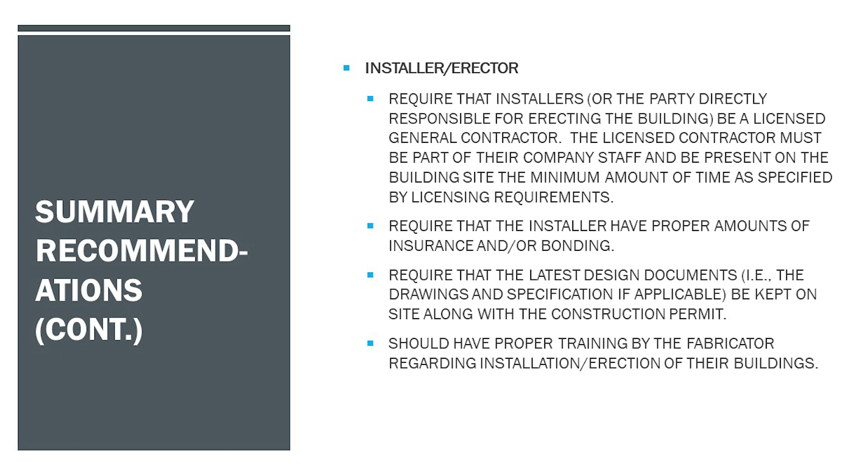For dealers, require that dealers carry the same limits of insurance and/or bonding that fabricators carry. Require that dealers have a licensed professional engineer on staff if they intend to make changes to the structure with the customer. If the dealer intends to erect the building, they need to be a general contractor. And of course, again, be factory trained for whoever they're going to represent.

Now, I've just laid out some major changes to the industry. These are my professional opinion. And you'll notice I didn't talk about the wrong way. But basically what I'm saying is anything done contrary to what I've defined is the wrong way.

I'll tell you a little story. There was a treasury agent who was asked by someone, how can you study all of the different ways to make counterfeit money? You know, there's a myriad of ways to do that, and he said, we don't. We study the original so well that we know when something else doesn't meet it, okay?

We need to start doing things the right way. And we're gonna see a lot of the problems that have come up go away. And nothing's gonna be perfect and no one is perfect, but at least we can take care of a lot if we would just implement some of these requirements.

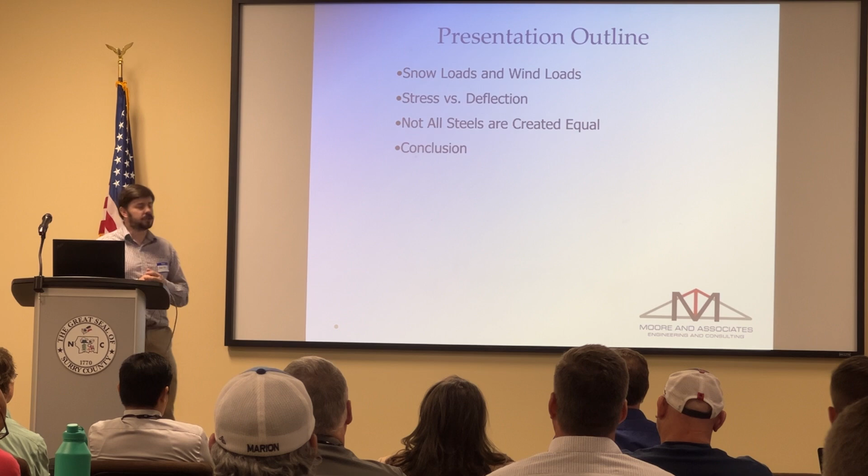So I'm going to talk to you a little bit about snow loads and wind loads, the loads that the structures are subjected to. Then talk to you a little bit about how do we determine if a structure can withstand those loads or not. Then I want to talk to you a little bit about how not all steel is created equal, especially in the cold formed steel industry. And then I'll have some concluding remarks at the end.

Ground snow load then gets converted to a flat roof snow load, which then gets converted to a sloped roof snow load, which is the actual load applied to the structure. So even though the ground snow load is 20 pounds per square foot, that doesn't mean that there's 20 pounds per square foot of load on the roof of the building.

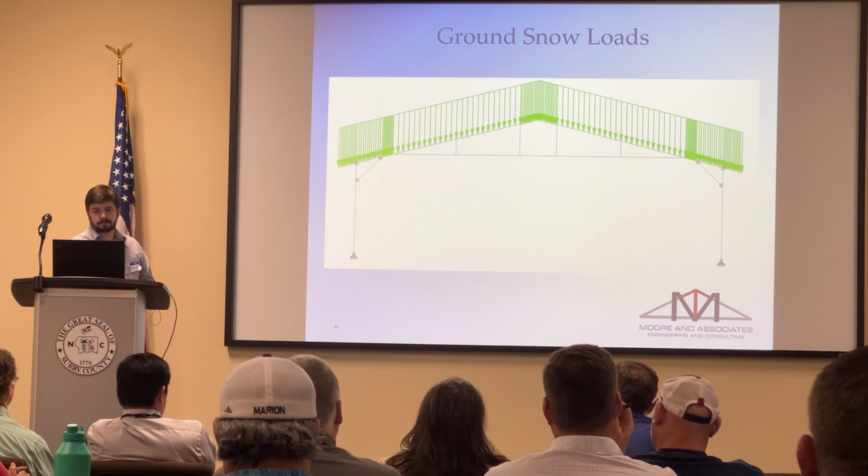Here's an example of one of our analytical models showing a gravity load. I'll go into a little bit more information about our models later when we talk about the analysis. While we're talking about snow loads, I think it's important to talk about snow drift, which is a phenomenon that does come into play in carport structures.

That is a snow drift, and that's additional load that gets applied to the roof of the structure that we have to account for. It varies across the country, but here in North Carolina, the density of snow is roughly equal to 16 pounds per square foot per foot. So every additional foot of snow that's sitting on top of a building, that's an additional 16 pounds per square foot of load that roof has to support.

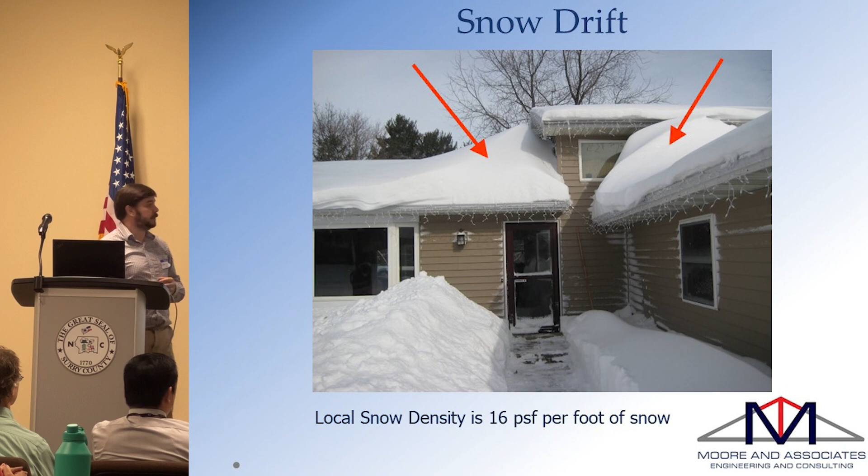Similarly, if you build a carport structure adjacent to an existing taller structure, you can get a snow drift build up. That should be accounted for in the design, and as a manufacturing fabricator, you should be aware of these conditions so they can be accounted for correctly. So that's kind of a gravity load, snow load issue. Now let's talk about wind loads.

Section 1609 of the International Building Code states that building structures and parts thereof shall be designed to withstand the minimum wind loads prescribed herein. And then it states wind loads on every building or structure shall be determined in accordance with chapters 26 to 30 of ASCE 7. So that's that same code we talked about earlier, just a different chapter.

Also, I want to point out, it specifically states that decreases in wind loads shall not be made for the effect of shielding by other structures. So even if the building being designed sits in the middle of a bunch of taller structures around it that might practically block some of the wind, the building code says we cannot take that into account in our design. It has to be designed for the same wind as any other building.

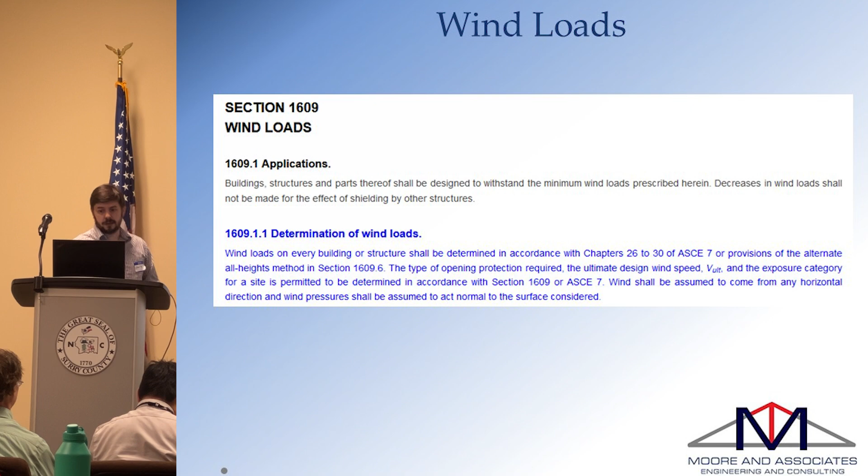So that's wind speed. How does that get converted to an actual force applied to the building? Well, wind speed then gets converted to a velocity pressure, which then gets converted to a wind load, which is that lateral force that actually gets applied to the building.

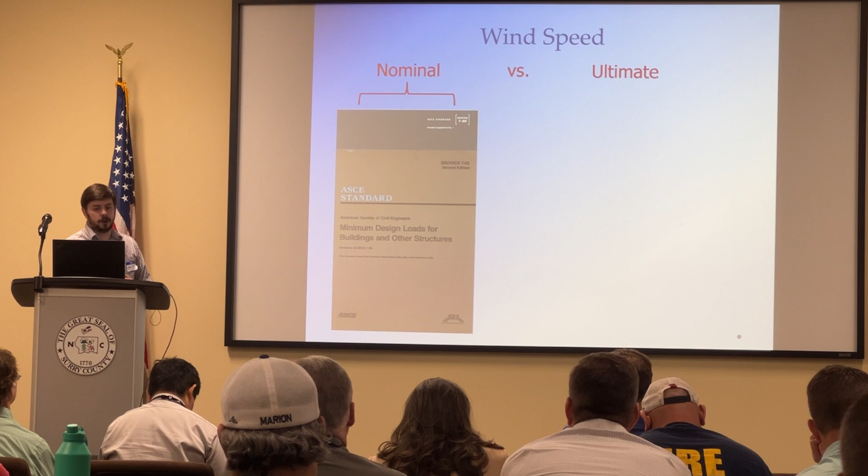Some of y'all might have heard or seen the terms nominal wind speed versus ultimate wind speed. I don't want to get into the weeds, but just suffice it to say that nominal wind speed is kind of the older method of doing things. Some of the older ASCE 7 codes reference nominal wind speeds. The newer codes reference ultimate wind speeds. So new codes, new designs are using ultimate wind speeds.

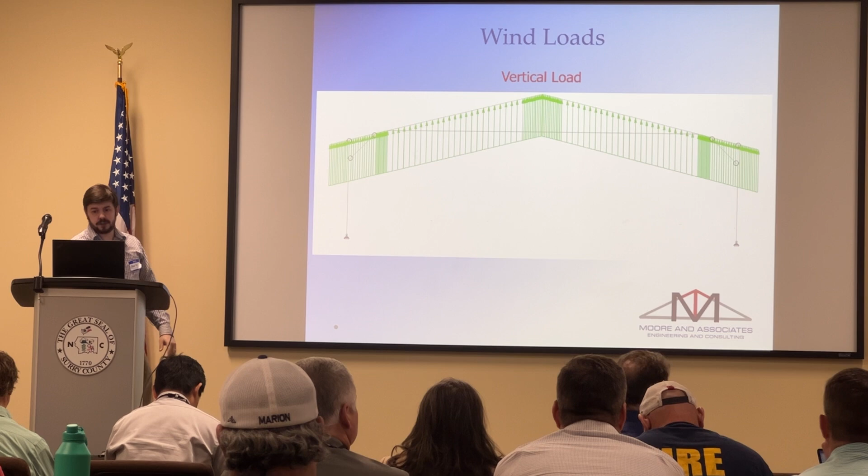Open buildings, there's no walls, it's just a roof. Again, you just have this uplift and down pressure effect on the roof caused by the wind blowing horizontally. Again, here's one of our analytical models showing a lateral wind load applied. I'll go into a little bit more detail here in a little bit. Similarly, from a wind's perspective, there's also this uplift force that has to be accounted for, or a down pressure force, whichever controls. This is just to show how we model that in our analytical models.

Also want to point out, there is a minimum wind load that has to be applied to these buildings. ASCE 7 states essentially that walls have to be designed to withstand at least a 16 pound per square foot wind pressure, and roofs of enclosed buildings have to be designed to resist an 8 pound per square foot wind pressure. For open buildings, again, there's no walls, it's just a roof, but the code says that open buildings have to be designed for a 16 pound per square foot wind pressure applied to the roof.

So what does that mean? Basically, that means even though your wind speed might be 105 miles per hour, and you have a calculated wind pressure of 8 pounds per square foot, the building code says you have to design the wall to at least withstand a 16 pound per square foot pressure, which may be the equivalent of, say, 130 mile an hour wind. So even though your design wind speed may be 105 miles an hour, you're essentially designing it the same way as you would a building with a site with 130 mile an hour wind speed.

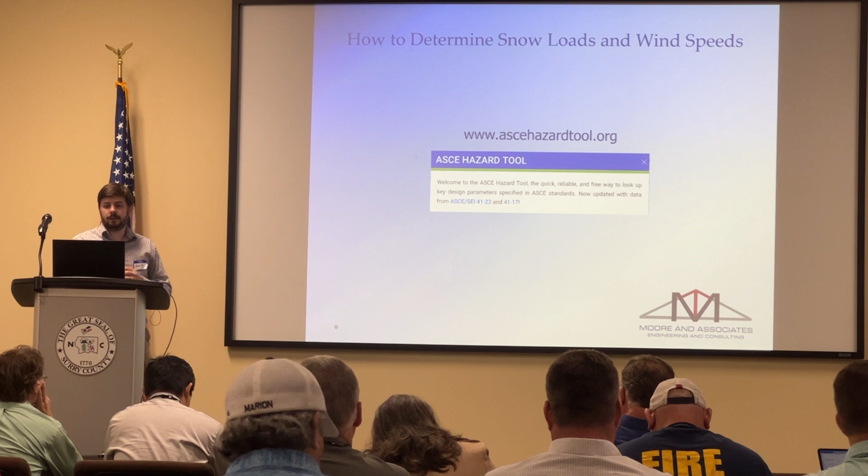So Pat kind of touched on this earlier, so maybe this will kind of reinforce that or give you some more information. If you want to know what the design wind speed and snow load requirement is for any site, you go to ascehazardtool.org. You'll find this prompt, like Pat said, you put in your address, you select what code you want to use.

I'll share that the 2015 International Building Code referenced the ASCE 7-10 document. 2018 and 2021 versions of the International Building Code reference the ASCE 7-16. So the ASCE 7 code gets updated periodically as well as the building code. So you need to know which code you're referencing. There is an ASCE 7-22 code published, but currently the building code has not adopted it yet, but I'm sure it will in the next update cycle.

Again, you select the risk category for the building, what kind of load you're looking for. You're looking for a wind load, snow load, seismic, anything else. Click on view results. You're going to get this. It's going to spit out a design wind speed and ground snow load. That's what's required for that particular property.

So let's talk about loads applied to the building. So now how do we determine if the building can withstand those loads? We look at stress and deflection. So stress is the amount of force applied to a member and the amount of force that a member can withstand. And then deflection is what's going to occur when that force is applied. How much movement is going to occur? The amount of movement is called deflection.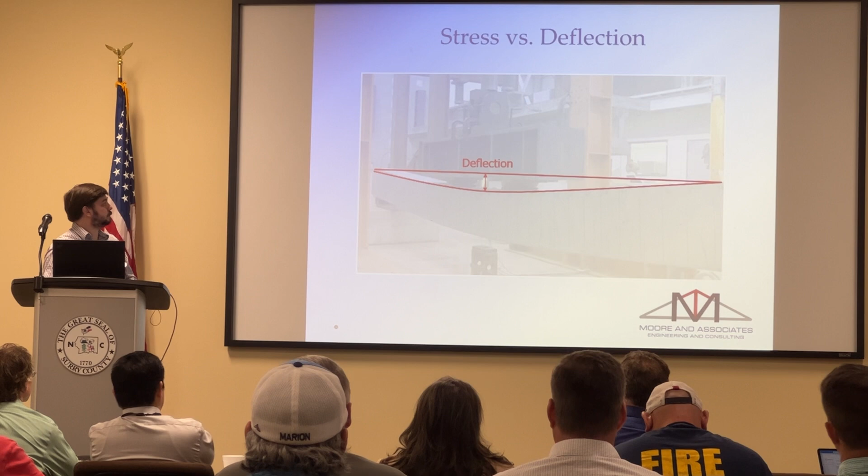So we look at these deflections and make sure they're within serviceability limits outlined in the code. So not only are we looking at the strength of materials, we're looking at the serviceability of the building to make sure that it's not moving too much and that it essentially becomes uncomfortable to be in.

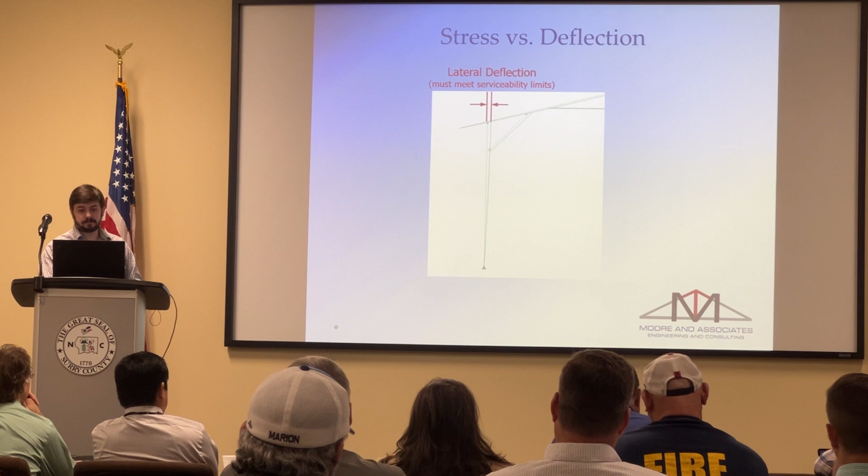So now I want to talk to you a little bit about steel. It's already been mentioned a little bit before, but there are different types of steel out there, and it's important that the steel used matches the steel used in the design of the structure. Most cold form steel that we see is being manufactured in accordance with ASTM A653.

And this basically just states that steel manufactured according to this standard has a certain chemical composition and certain mechanical properties. Chemical composition affects the weldability of the steel or the strength of the welds. Mechanical properties affect the strength of the material itself.

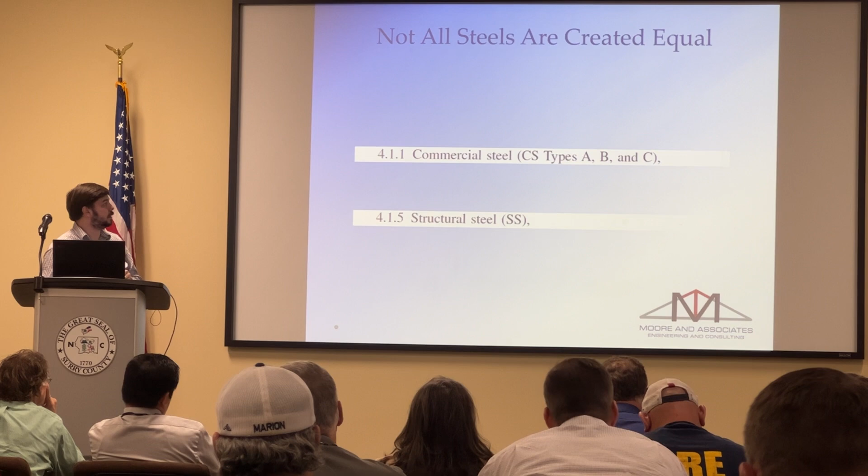There's a couple different types of steels outlined in this standard, but commercial steel and structural steel are the most common, the ones you're probably more familiar with. I want to point out some of the differences between CS grade and SS grade steel. So we look at chemical requirements for CS grade steel. Just for the sake of this presentation, just look at the carbon content. It's anywhere from 0.02% to 0.15%.

And if you look at the chemical composition for structural steel, it's anywhere between 0.2% and 0.5%. So an order of magnitude more carbon in the structural steel. And not only that, it's not a range of carbon, it's a minimal carbon content.

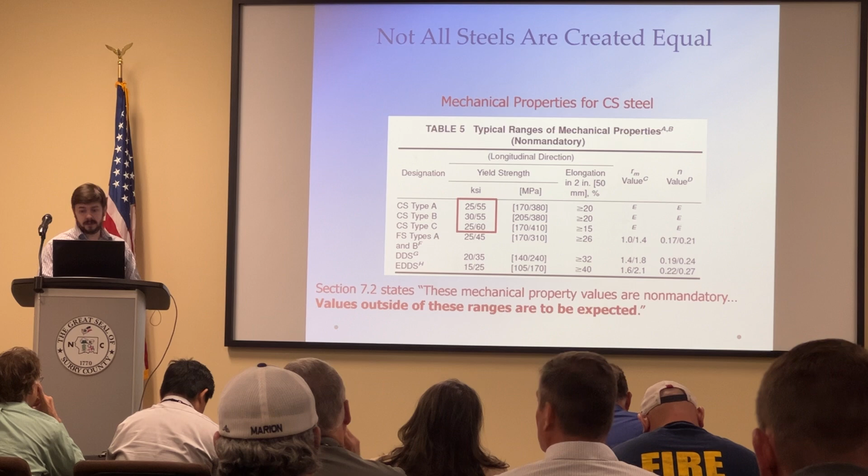Similarly, if you look at the mechanical property for CS grade steel, yield strength is going to range anywhere from 25 to 60 KSI. But more importantly, the standard says specifically these mechanical property values are non-mandatory. Values outside of these ranges are to be expected. So your CS grade steel has no guaranteed yield strength, which is important, especially when you go to design a structure and you're making an assumption on the yield strength of the steel that's going to be used.

Similarly, if you look at the mechanical properties of SS grade steel, yield strength ranges anywhere from 33 to 80 KSI. Most designs use a 50 KSI yield strength, which would require an SS grade 50 steel. But these are minimum values, so whereas CS grade gives you a range of yield strengths, none of which are mandatory, SS grade says this is the minimum yield strength.

You can have something greater than 50, but it is never going to be less than 50 KSI, which is important. Again, if the structure was designed assuming a 50 KSI yield strength and 40 KSI is used, that structure is not going to behave the way it's intended.

So to summarize, when we design these buildings, we first determine the snow load and the wind load applied. Then we determine the material properties, what's the yield strength, what type of tube is being used. Then we analyze stress and deflection utilizing structural engineering theory, supplemented with empirical test results, some of the university testing that Wayne had mentioned earlier. And then we use our analyses to inform our structural drawings and specifications.

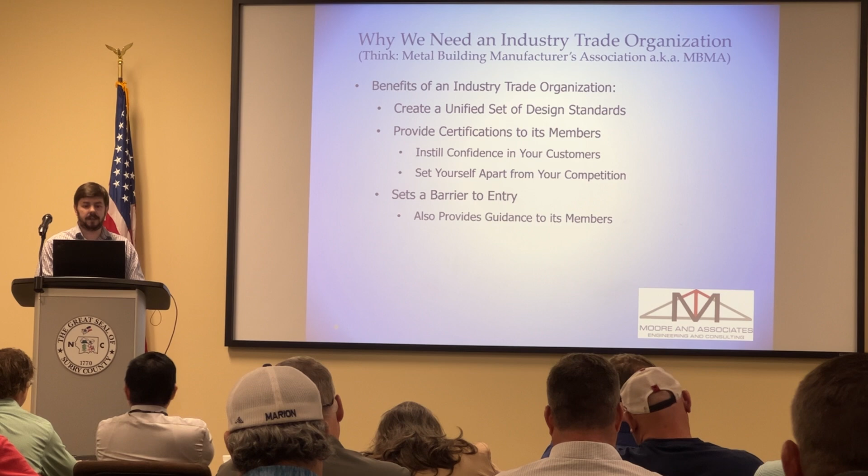It'll set a barrier to entry. So people that are not certified will have to jump through the same hoops as everybody else to get certified. And along the way, they'll learn about the right way to go about designing and erecting these buildings.

And then once you are a member, it'll provide guidance and help answer questions you may have. It'll provide industry leadership. It'll promote the industry. It'll help do some marketing. It'll help get carports in front of more people, which might help increase sales. Again, it'll help perform some research and education training, provide training opportunities for its members.

But the key is that this type of organization has to be created by the members for the members. So all the manufacturers here have to be the ones to come together and create this organization to help govern the industry. And dare I say, it's better for you to regulate yourselves than it is to have the regulators come in and regulate you. So it's good for you.

I think it'll benefit everyone involved. It'll help drive sales. It'll move the industry forward. Instill more confidence in the general public. I don't see it being a bad thing whatsoever, but you as manufacturers have to be the ones to create this and get it up and running and participate. So I want to challenge everybody in here to be a leader in their industry. Please consider the formation of some kind of industry trade organization.

Keith mentioned a Surry County Metal Building Manufacturing Association. Maybe that's a good step, but I'm dreaming bigger. I think it should be a nationwide organization, again, akin to the Metal Building Manufacturers Association, that will help raise the bar, drive the industry forward. I don't see it being a bad thing whatsoever. And that's all I have.

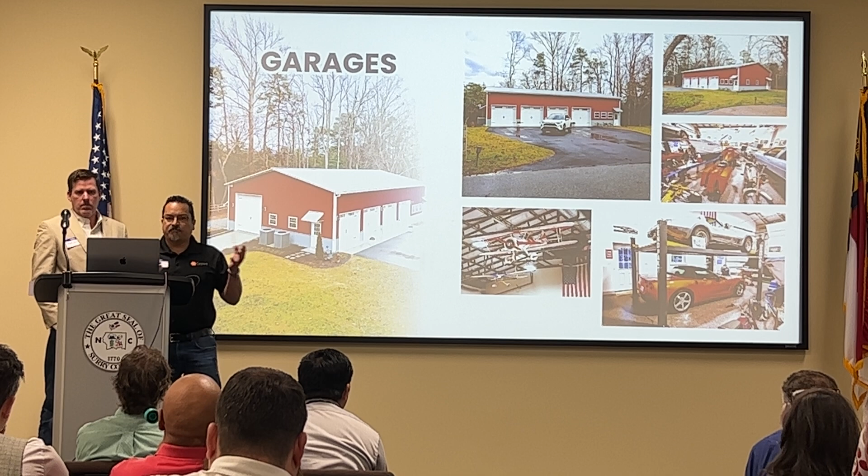We're seeing a lot bigger structures where they even go into the risk category 2 realm as well. So we have been talking about risk category 1 structures, and what I'm going to talk to you guys about is our journey basically. And now we're seeing more risk category 2 structures, larger structures. Obviously from this we also go into more of the commercial area, commercial structures, commercial storage, and I'll show you some commercial projects. But it's just the evolution that we've seen.

So basically commercial storage, where a business comes to us and they need extra storage for their product. From commercial storage, we also graduated into commercial structures. A lot of different commercial structures that we've done over the past couple of years, but this particular one is a church as a commercial structure. So it's hard to believe, from that one open top to a structure that now is a place of worship. So there's a lot that goes into this type of fabrication, and obviously the engineering behind it as well. So this industry is evolving a lot, particularly for ourselves.

Like I said, we've seen a lot of shift, a lot of changes. Mostly, I've seen the slides, and believe it or not, we did not get together and say, okay, let's talk about this and let's get all together. And it just seems coincidental that we've talked about the barndominiums, the metal homes, the residential part.

So for us, our journey has been more into the research and development of these structures, because over the past 3 or 4 years, believe it or not, a lot of our structures that go out every week from our plant, it's about 2 to 3 of these residential structures every week. That's a lot. 2 or 3 homes go out every week from us. Now we service a lot of the country, all the east and southeast. So a lot of this you don't see in North Carolina. You see a lot of different areas.

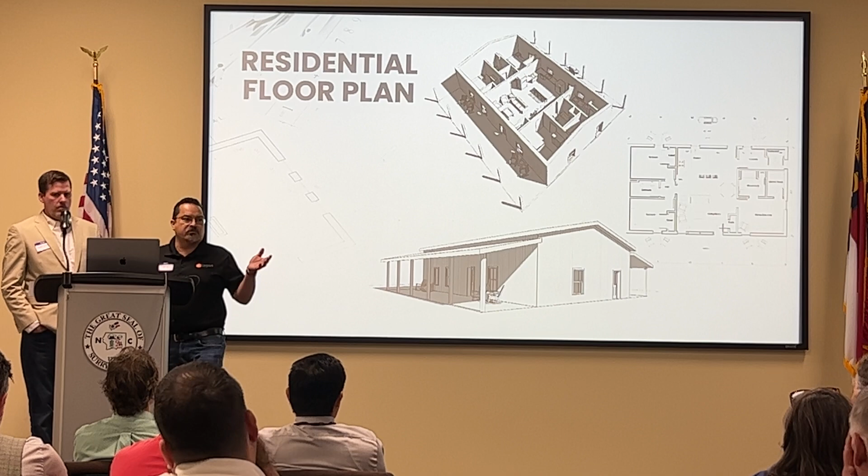But before we got into this fabrication process, we wanted to make sure that our product was safe, make sure that our product meets all the codes and requirements. So from the fabrication to the engineering and the research and development, talked about floor plans, then now comes the residential. So again, we are doing these every week. So part of that research and development taught us, okay, how do we make sure that these structures are behaving the way they're supposed to? How do we do that? Well, again, I'll let Mark talk a little bit more about what we're getting into now with his experience and a little bit of his background as well.

Good afternoon, guys. I'm Mark Hyatt. I'm a PE, and I work with American Building Network. We're under the Central Steel Group of families owned by Jay and his brother Howard. Today I'm going to talk a little bit about energy code compliance and our risk category 2 structures.

As Jay's mentioned, American Building Network will manufacture between 2 to 3 metal homes and 3 to 4 commercial buildings each week. These structures are different than our carport and utility structures, whereby our carport structures present a low hazard to human life and are not intended for occupancy. These homes and commercial buildings are considered to be risk 2 structures and are intended to be occupied.

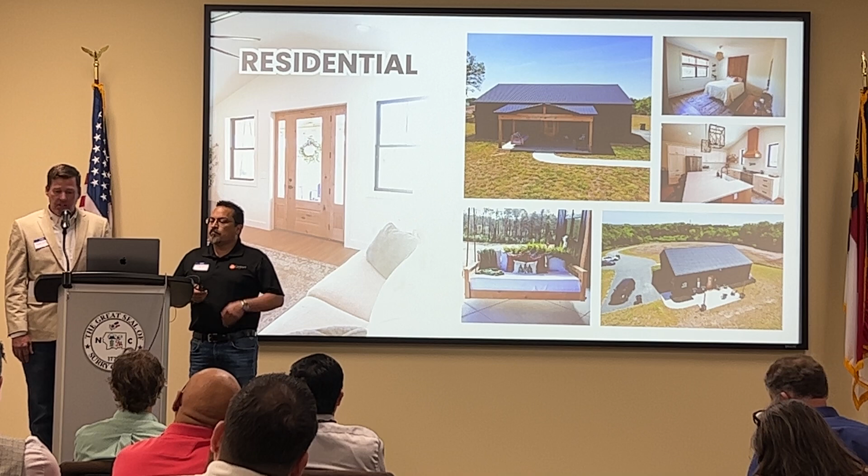Like most in the industry, in order to assist with our customers' permit needs, we provide our engineered master plans for the size structure that the customer is intending to build. Our master plans are basically assembly and connection details for a certain width of building, and our master plans, though, only apply to the shell of the structure. What we've been seeing in the past few months is many building inspection departments in our service area are requiring our metal home and commercial customers to provide documentation of energy code compliance and how these details will be achieved in our high strength tube steel buildings.

So here at ABN, and specifically for the state of North Carolina, we partnered with a local architect who has performed a thermal energy compliance analysis of our structures. The research and analysis ensures that our structures can meet the IECC compliance requirements for our local thermal zones here in North Carolina. We will share this information with our customers to ensure that the homes and commercial buildings that ABN manufactures will be code compliant when finished. So if you're manufacturing or selling metal home packages or commercial buildings, you need to be sure they're constructed in such a way as to comply with the energy code requirements in the area that it's located. Otherwise, your customers will likely be in for a bad experience.

So, like Mark was saying, we try to comply with every facet of the design criteria, as well as you've seen some of these slides already in the prior presentations. Now, what we did is we partnered with a major university, and we wanted to make sure, are they doing what they're supposed to be doing? So, as you can see, we pretty much took this product and destroyed it and have all that data that we use in our designs and our structures.

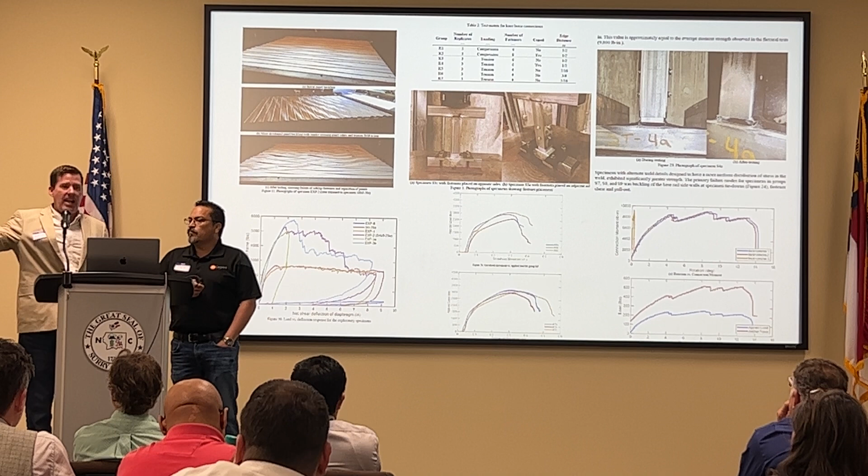Going back to the testing slide that he was showing earlier, basically what we did, we constructed welded connections and braced assemblies from our tube steel products. As you can see, we even built wall and roof assemblies, applied sheeting on them, and then they were tested in tension and compression loads until they failed. And basically what we found out is that our materials did not enter failure mode until the applied loads were well in excess of what would have been considered a design load.

So with that being said, I think we're all here to try to make it better, do something different. So some of our concerns, now this is from us, and you guys may have the same concerns we do. Our concerns, for example, a lot of manufacturers or people coming into the business don't understand what it takes to do the major manufacturing like some of you guys do, like we do. So not following proper design specifications are a concern, not properly licensed and insured. Obviously, we have to have everything in order for us to do the things that we do.

Not using design-specific materials. So like I said, for us, we have specific materials we use, we have specific designs that maybe other people don't use, but we use them. But they're required in some of the fabrication of homes and commercial structures, not just for risk category 1 or 2, but we've done a lot of risk categories even above the risk categories themselves when we deal with the Department of Energy.

So there's a lot of things that we've learned along our way, but also our concerns, again, go back to the welding standards. We're associated with the American Welding Society, and our welds are checked, and we have a quality assurance process that we do as well. But fabricating, our concerns are fabricating in residential and non-commercial locations, workplace safety basically. So a lot of the manufacturers now are fabricating in unregulated areas, like a residential location.

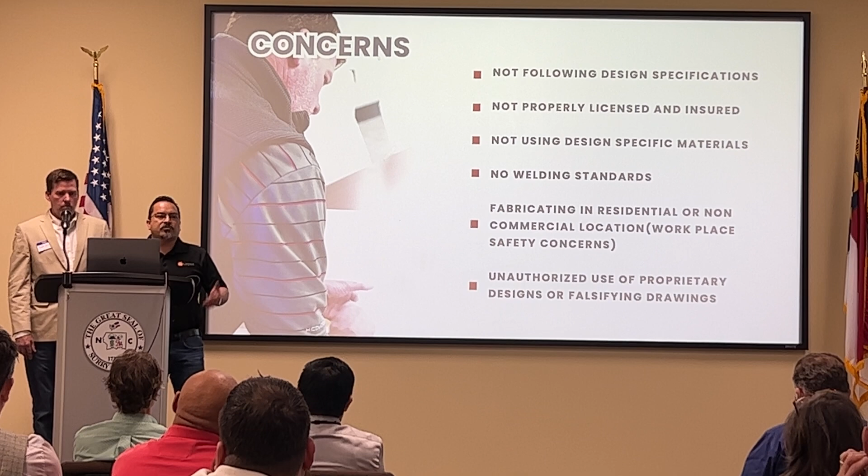So these concerns, I believe we probably all share the same, and being that this is a forum and a roundtable, hopefully more will come out. These are just a few of our concerns. Now, from this summit as well, we hope to get some recommendations, not just from our own peers, but also maybe from the state level, if they can help guide us in what we can do. So just a few recommendations on our end.

Obviously, we can come up with a whole lot more, but same thing, like I said, we've noticed in other slides, probably some kind of approved manufacturer list on the city or county level, where we're on that manufacturer's list where people can go to the county and if they want to pull a permit, they know who we are. Maybe some kind of third-party manufacturer certification process, like Mr. Moore was talking about, like the city of Houston does.

Or even possibly a master filing system like Florida does. Their counties are master filed with our master designs, and someone goes to pull a permit. Well, okay, yeah, you're with this company, we've got your design, what size building? Yes, here's your permit. So something along those lines. Again, these are just some recommendations we have. We're hoping to get more recommendations from everybody here as well to make this industry better.

But again, I want to thank you guys for coming out, because I do see a lot of people that we know, and I know just by being here, you guys actually want to make a difference. And so we're excited to see where we can go from here and what we can do to make it better.